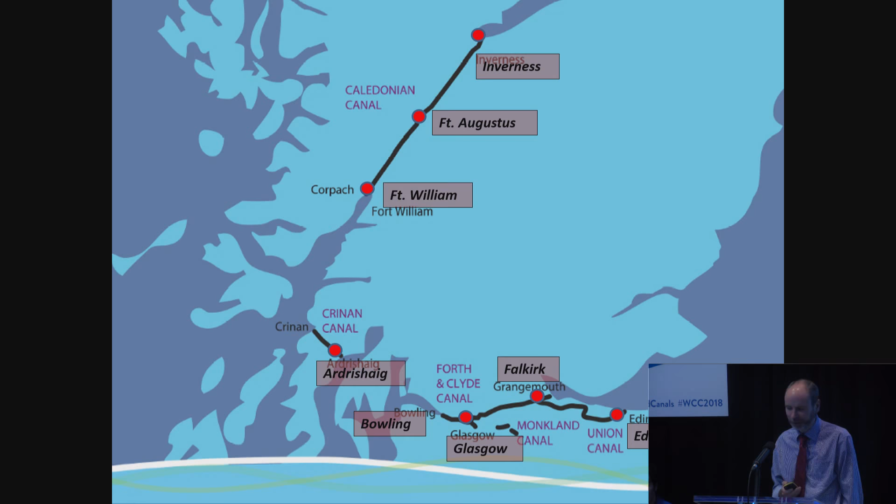In Scotland, we're lucky enough to look after 4.5 of the canals that are left, 140 miles from the Great Glen through the Caledonian Canal to the world's most beautiful shortcut on the Crinan Canal, and then to the urban canals in the lowlands with the Forth and Clyde, the world's first man-made sea-to-sea navigation, and the Union Canal stretching right into Edinburgh. And a tiny little bit of the Monkland Canal is left, but I'll explain as we go through where the rest of that has gone. So we look after some amazing views in Scotland.

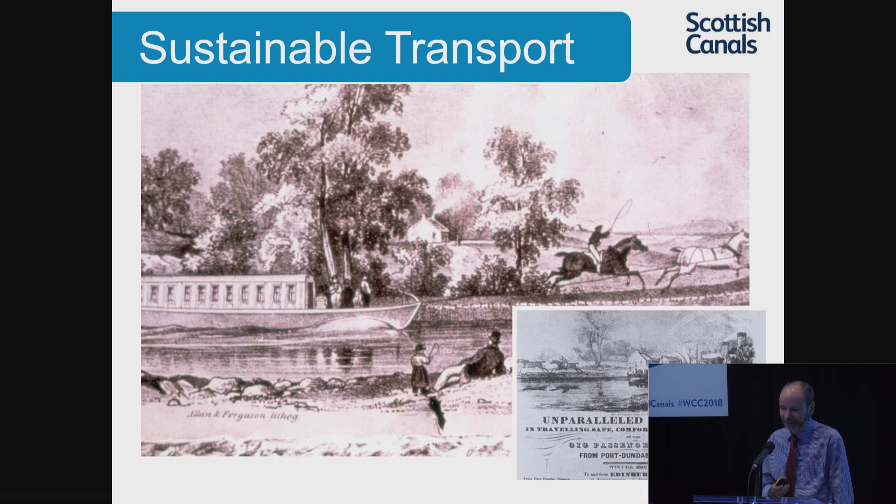And they transformed Scotland. You can see here, this very much could have been an EasyJet advert - unparalleled cheapness in 1820, extremely fast travel from one side of the country to the next. And you can see here the size of the industries that grew up on the banks of these canals, and the puffers that passed through.

And when you talk about EasyJet or Ryanair, you know, very similar - they piled them in and packed them in close and transported them through Scotland. But slowly and surely with the canals, and certainly in the central belt, the railways started to come along, and they really did challenge the canals in the 1850s and beyond.

The railways took a lot of trade from the canals by 1900. Slowly and surely, people's view of how important these canals were changed.

This is a picture here from the 1950s. This was the vision for Glasgow. Canals were no longer part of that vision. This was all about motorways, postmodern buildings, and when you look at Glasgow now, they pretty much delivered what you see in that picture with the motorways there.

They actually found the Monkland Canal as an absolute perfect way to build a motorway into Glasgow. So they filled in the Monkland Canal, put the motorway on top of it, and now we've got the Monkland Canal running underneath the M8 motorway. So it still remains the busiest canal in Scotland, but only for cars travelling over the top of it.

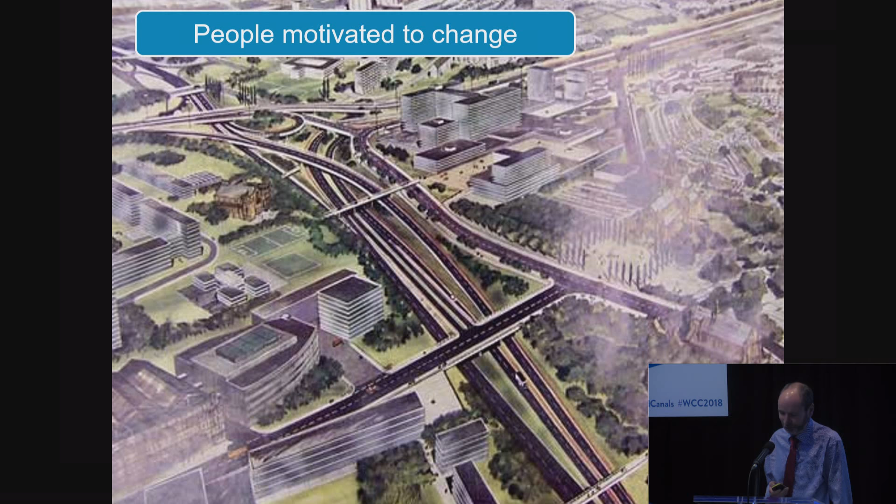1962, Central Scotland: the Forth and Clyde Canal is closed to make way for the motorways, and the Union Canal in 1965. Once you stop up canals, once you put culverts in place and people no longer see them as belonging to them, they fell into disrepair.

This is 1996: 'Our canal, our future.' The Millennium Link was born in the 1990s and fought through, and a lot of investment was raised - £83.5 million - to deliver a massive engineering project: to find ways back through those motorways, to lift the utilities, to put a new towpath along the side of the canals, to remove the contaminated silt.

When you look at this picture, this is Wester Hailes. This was a new town built near Edinburgh that no longer needed the canal, so they built roads and houses, filled it in on the Union Canal there, and never bothered to build a pavement because the car was the future. You can see the person walking along the road there, and that's how it was treated in the 1960s. We needed to squeeze the canal back through.

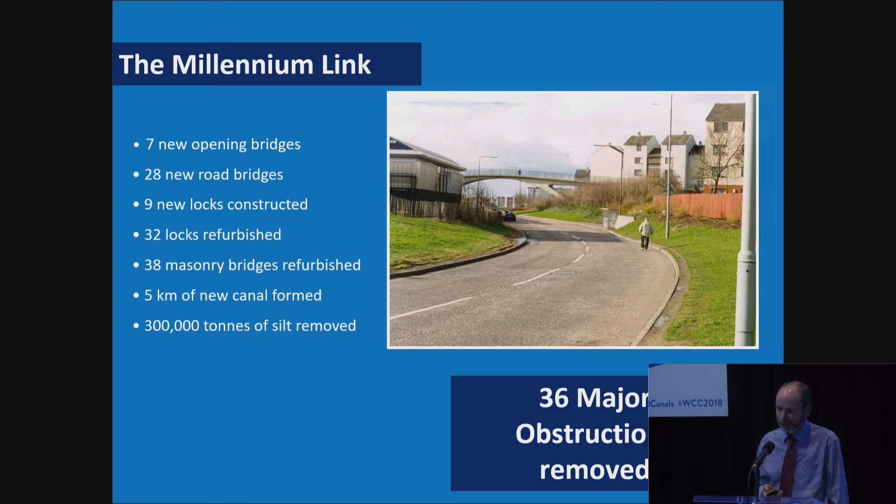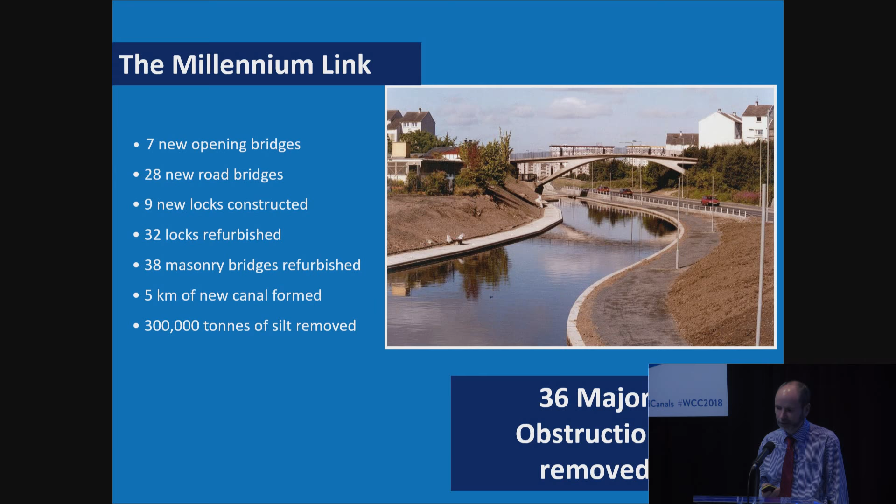So at the same bridge, we put the road to the side, squeezed the canal through, and reopened the canal right back into the capital of Scotland. And this is what it did - that's what the canal looked like, and that's what the canal looks like now. £60 million of regeneration happened around and about that end of the canal almost immediately. The boats arrived, the regeneration effect grew and grew, and there's now £120 million of regeneration in that area.

That was a contaminated site that had been Scottish tar works, had burnt for many years, and we had to, as engineers, resort to what we like best: a good malt whiskey, some Technic Lego and a pen, and some very late nights. We drew some ideas for what the Falkirk Wheel could be, and some great engineers started to come up with ideas for what this could look like.

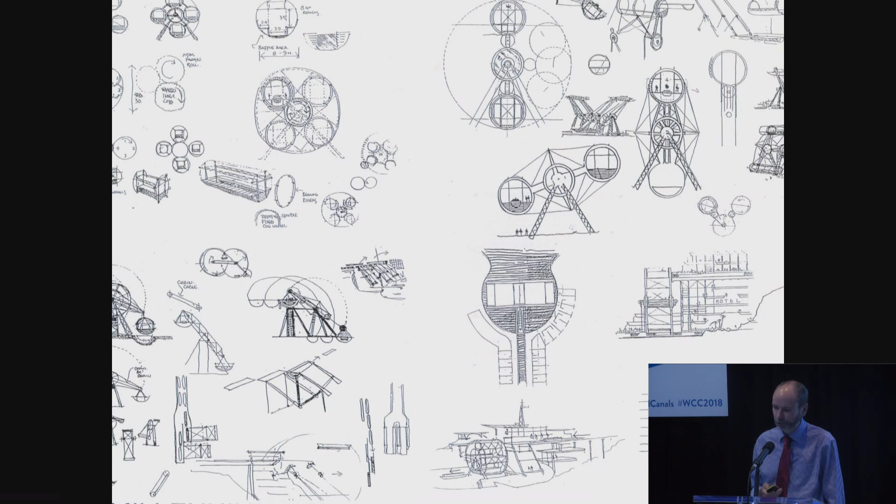Technic Lego does it every time - it created a new mechanism there, and we were able to show people how the Falkirk Wheel would work. That really built people's trust and belief, and the money came in to create the Falkirk Wheel. It developed on a field in Falkirk. People had all sorts of ideas as to what this was going to be, but there you go.

The Falkirk Wheel now welcomes 600 to 700,000 visitors a year to the site, day and night, to come out and experience it. It supports 60 jobs, and supports the regeneration of the local area.

Every penny that's spent, every bit of profit goes back into reinvesting in the canals. So that's the history, really, from way back in 1768 through to its glory years in the 1820s. But we now believe we're in a renaissance here, and we can take these canals to the next level.

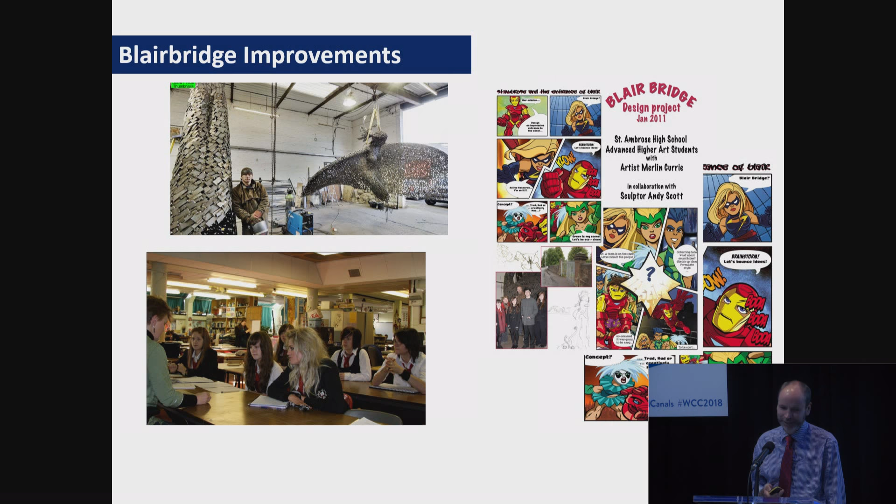This is the Monkland Canal, and again an entrance to the canal that really wasn't up to scratch. We worked with lots of the local school kids and got them involved. We found that Mark Millar, who wrote things like Kingsman and Kick-Ass and lots of comics, used to live three doors down from here on the canal. We got him involved, and the school kids just loved it.

They came up with all these themes as to how they wanted to interpret the canal, and they created these time-traveling twins. We also found what was certainly the UK's first iron boat. We were able to develop all of these ideas into archways that celebrated the canal and the future - that's Captain Coatbridge jumping out of the canal, saving the day, with industry and heritage on one side and nature on the other. A fantastic seven-metre high archway.

This was the first iron boat in the UK, and this was a model of it that had been made in the 1980s. We found it rotting and decayed. We got the school kids involved, and they wanted to turn it into a classroom. We were able to raise £500,000 and actually transform that and create a new classroom for them.

We've used art to celebrate heroes, local heroes in the area, and developed these sculptures which represent people who have been famous in the area and have delivered around and about the canal.

We've also brought artists in residence onto the canal. This is Leslie Banks, a fantastic artist, brilliant at painting water. She has delivered 60 paintings of the canal now and continues to run her gongoozling exhibition across the country.

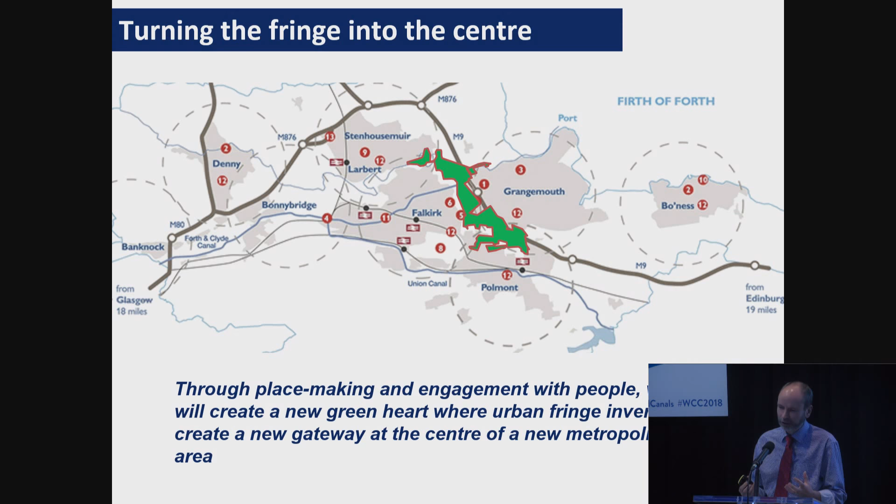In Falkirk, we've worked with the community again to develop ideas for how we could connect Grangemouth and Falkirk back together. This bit of green in the middle had been designated as green belt, and the community didn't want to be separated - there was no real way of getting underneath the motorway. They wanted to be together, they wanted space that they could share. We worked with them, and over 1,000 people engaged in this project to develop a people-centric idea of how canals and green space can bring people together.

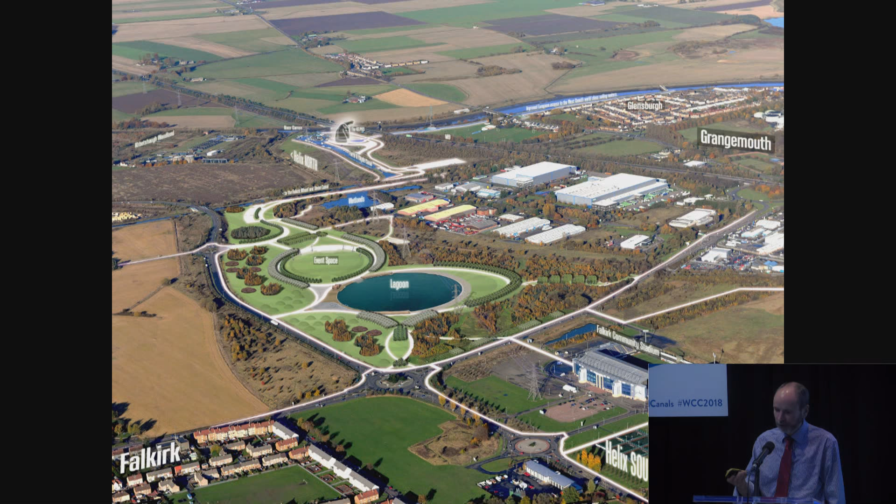We started bidding for a national lottery prize, and in November 2007 we won £25 million. We popped the champagne corks, we celebrated, and then we realized that the next day we had to double that money. Suddenly the recession hit, and we really struggled to get the rest of the money together, but eventually we did - and I'm so glad we did, because this was the community's vision to transform the space between Grangemouth and Falkirk into a place that people could join.

They wanted a new parkland, they wanted a lagoon, they wanted a canal that connected properly with the river. This is the community coming out to celebrate 27 kilometres of new paths being created. This scrubby bit of green space suddenly became a parkland that became famous in Scotland, and the community came out. One million people a year are now coming to use that green space. Before that, there were probably only 200 to 300 people, and a few deer - we've kept the deer, but we've also got the people in the space now. And you can see, this was the day we opened.

15,000 people on that first day came out to celebrate. What is this all about? How can we use it, and how can we have fun with canal water—even that dog drinking it there.

From a canal perspective, we wanted to finish the Millennium Link. We wanted to stretch the canal back down to sea because we'd managed to get the canal to the river, but what was left, as you headed downstream, was a motorway bridge, a 36-inch water main, another A road, and a sewage pipeline that you had to find your way through. And the boats really did not like it, and we had to find a way of squeezing them through.

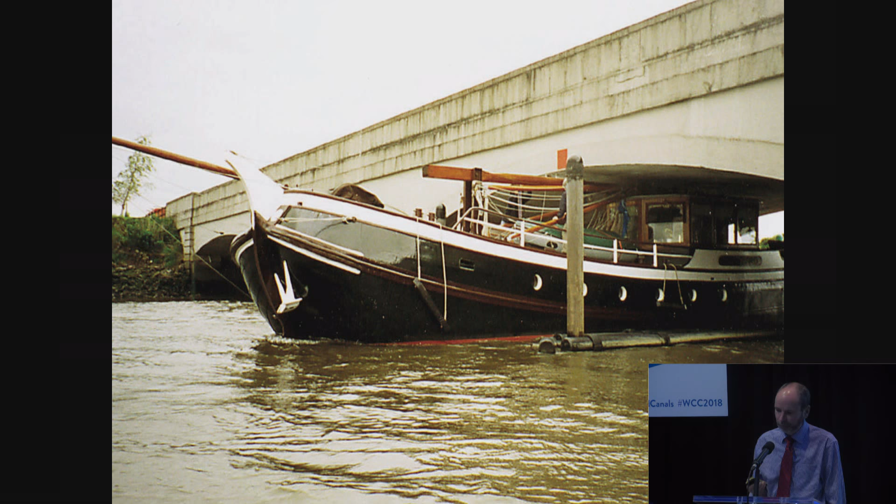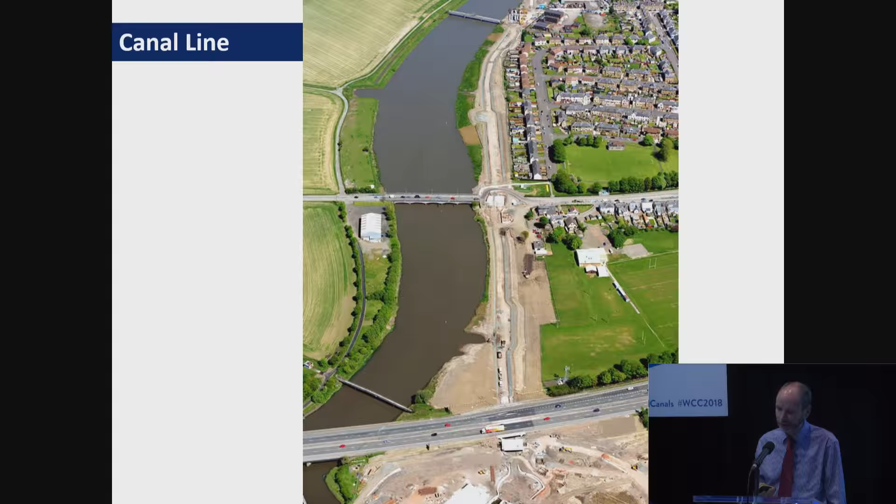So we designed a new canal that brought flood defence to Grangemouth, stretched 1 kilometre down the side of the river, and opened that in 2014.

But we also knew to get the money, we needed something that would catch people's minds, their hearts and soul. We needed to create, like the Falkirk Wheel had done, a real jaw-dropping icon.

So we looked to the past, we looked to the shipbuilding, we looked to the ironworks, and we looked to this wonderful legend of the world's largest horse, Carnera. Not sure it was the world's largest horse, but by legend it is—amazing what you can find on Wikipedia. That horse had been in Falkirk and had pulled one of our national drinks, Barr's Irn-Bru, round the town, and it was very much a local hero.

And we looked to this idea of the legend of the past, the Kelpies, which were mythical Scottish water horses. Nessie is meant to be a Kelpie. They had the strength of 10 horses and the endurance of many more.

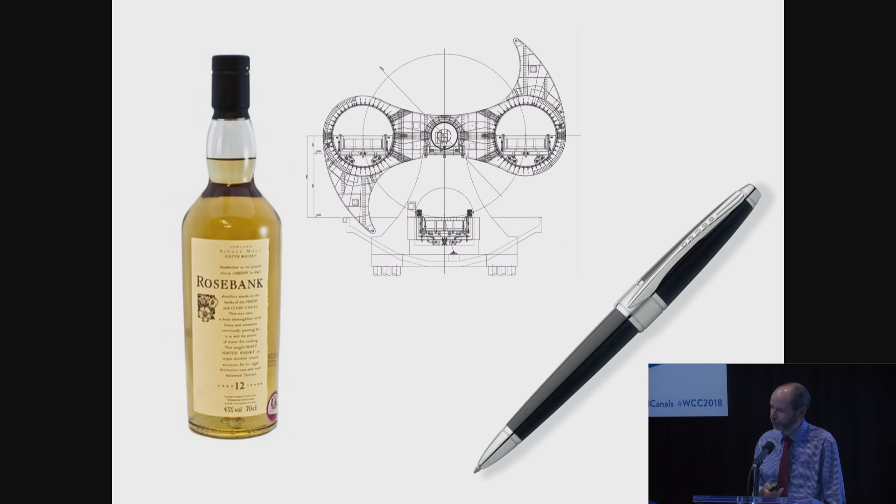So we took that idea and we developed it, and we looked around the world at some of the best art that exists. We took those ideas and found an artist we liked in Yellow Pages, and we got him out for dinner. Before that, we'd resorted back to our whiskey, our Falkirk Wheel, and our pens, and we had a few late nights—I think this night we might have had too much whiskey, because this was the idea we came up with.

30-metre high horses' heads that would be a counterbalance to a lock chamber that would lift them out of the river.

We knew we hadn't quite got it right that night, so we sat down with the artist, and he started scribbling out what this could be, what we could develop, and how it could be. He slowly and surely brought these designs together.

We knew we'd got it right when you took it out to the public and the kids started stroking the horse. It was a chunk of steel, but they kept stroking the nose of the horse and starting to wear the nose down. And this was the idea for the Kelpies.

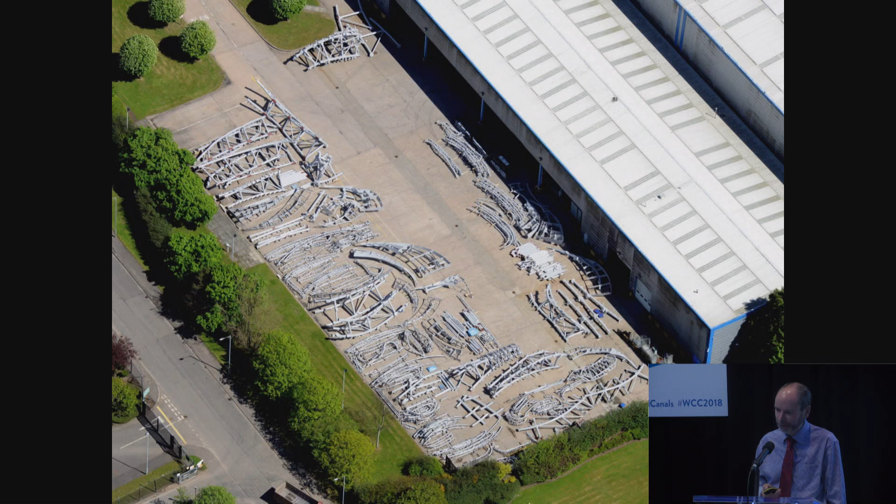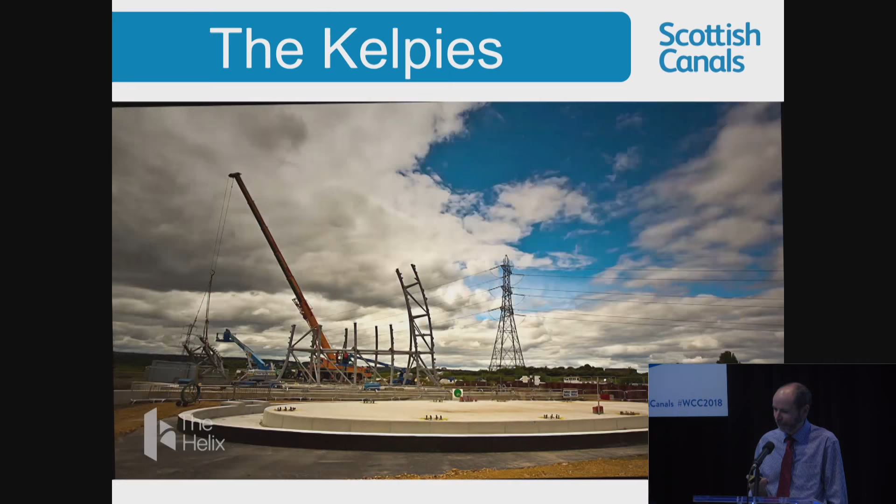We were lucky enough to win the money, and lucky enough as an engineer to get the biggest Airfix model you could possibly ask for. We got all of these pieces of engineering, and then slowly and surely we were able to build them on site. So 3 years of design and fabrication brought together the Kelpies and delivered within 75 days.

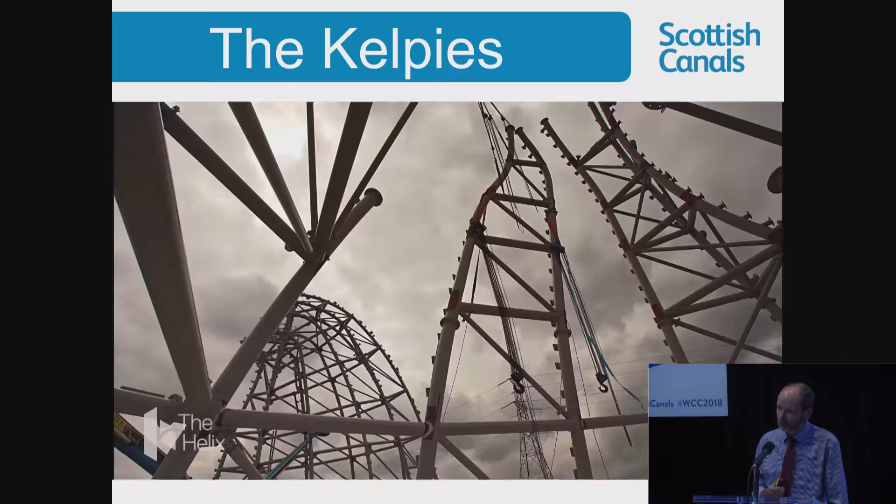They transformed this corner of Falkirk and created these beautiful pieces of art. You can see right through the middle of that, a lock chamber going through the middle of it. This is a welcome to Scotland—this is how you arrive through these colossus that is the Kelpies.

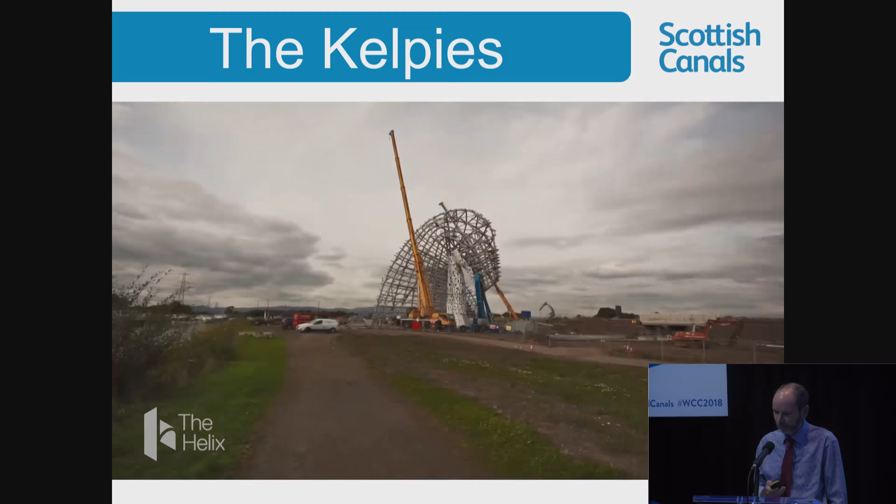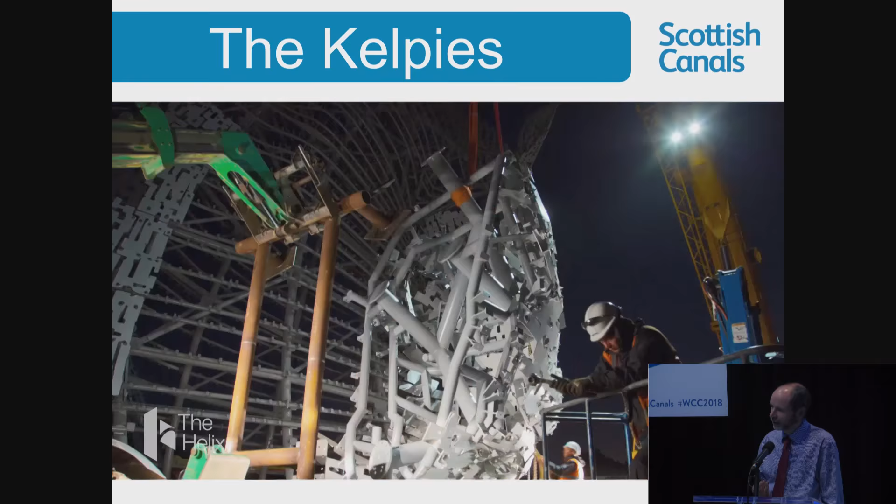Slowly and surely they get ears. Need to speed this up—there's some tricky lifts in the middle of this. But that gives you an idea of how canals, imagination, and reimagining places can change places in literally 75 days.

You get an idea of the cathedral-like space inside and the beauty of the sculpture that is there. And again, that's now bringing 1 million people into a space between a sewage plant and a motorway. It really should not work, but people are coming out to spend time, and they have ownership of these Kelpies.

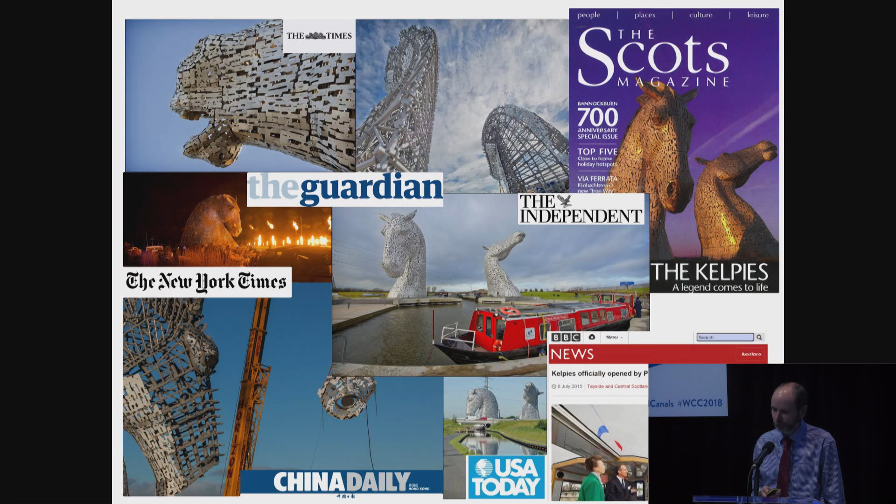That's taken us global. It's taken us to Chicago, New York, and various other places across the world—we've been able to go with the Kelpies. And it's got the boats coming back through the canal.

It's horsed us past the winning post. It's been to the Ryder Cup twice and has helped the Europeans win the Ryder Cup - it wasn't the last one. Maybe that's something that you need to think about.

But you can see here where we've been with the Kelpies, and you think how the canals have changed in 20 years. We've even had royalty visiting, and almost as exciting for me as an engineer is the fact that we were able to launch the Ferrari California T at the Kelpies. That's how canals can transform, that's how people can see their communities change, and that's part of what Scottish Canals does.

In literally 20 years, we've been able to take canals from places where people left their minis, left their sofas, put their shopping trolleys, and we've been able to transform it, and the effect has been amazing.

In a study that we did in 2015, you can see here the canals over the last 15 years have supported 5,000 jobs. They've seen almost £1 billion worth of investment - £83.5 million in 2000 and 2001 has delivered almost £1 billion worth of investment and supported almost 5,000 construction jobs, and 5,500 new houses on the banks.

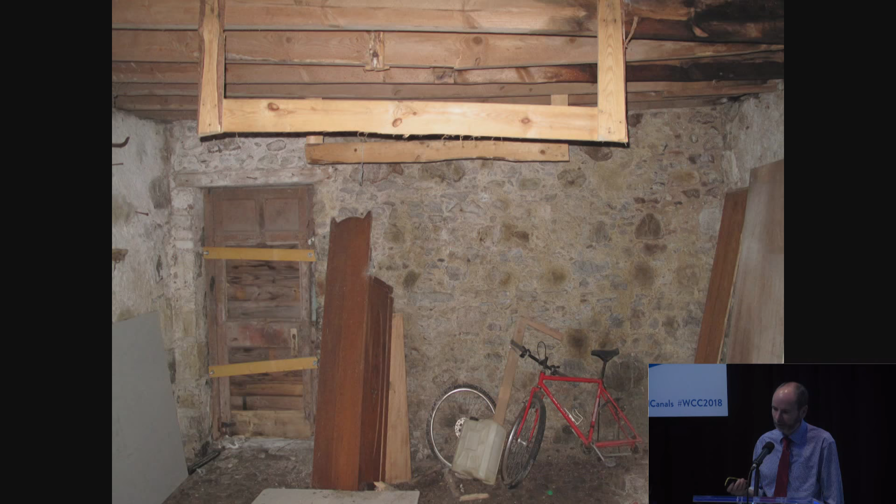Build the quality in, encourage people in, encourage the spend, transform buildings that look like this into that. People will spend money, and that money again gets fed straight back into the canal.

From Glasgow, where there was derelict warehouses, they've been transformed into flats. People want to live on these canals now, so we have boats on the canal, we have places where people can live, and the demand is really strong.

We've developed our own products, and that bottom left-hand side is a shopping trolley transformed into a chair, through to our own tweeds and our own tartans, through to the Caledonian Canal Centre that has just opened. It's a fantastic space with a cafe, with a shop, and people spending money, but there's money then being reinvested back into the canals.

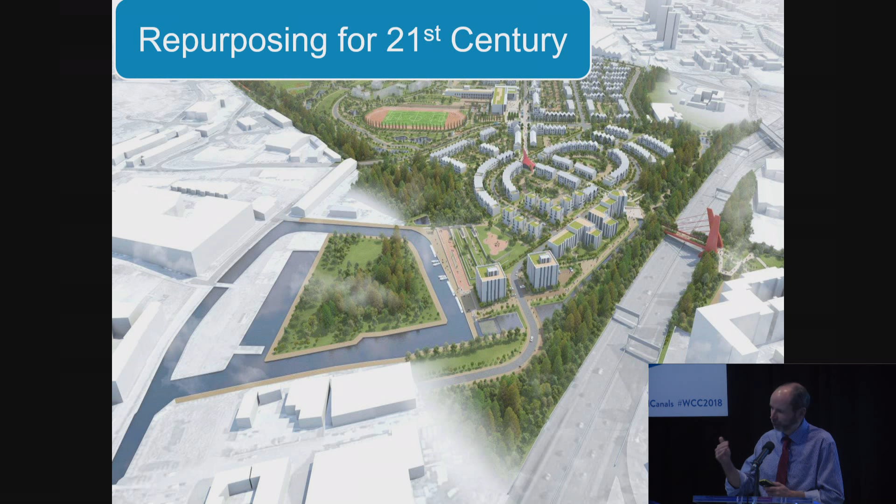Right through to repurposing them for the 21st century, where we're now taking surface water from 5,000 houses and charging for that surface water to come into the canal, managing the canal dynamically so that when we know a storm's coming in, we can drop it by 100 mil and we can take that water into the canal.

So to finish off, I took this picture 20 years ago, maybe a little bit more now. That is Falkirk 20 years ago. And when you think about where we've got to now, we have transformed.

We still have our challenges - the asset management is hard to deal with, and we've got to keep working on that. But places can be reimagined, places can change. Working with communities, the most amazing things can happen. Thank you for your time.

Thank you so much, Richard. That was really incredible. It's amazing to see how art can influence engineering and vice versa, and how really what's so incredible is that you can give people who are in maybe deprived areas a sense of pride in the place that they live, and that they can see that they too can live in a place that's incredibly special. So that was really fabulous.

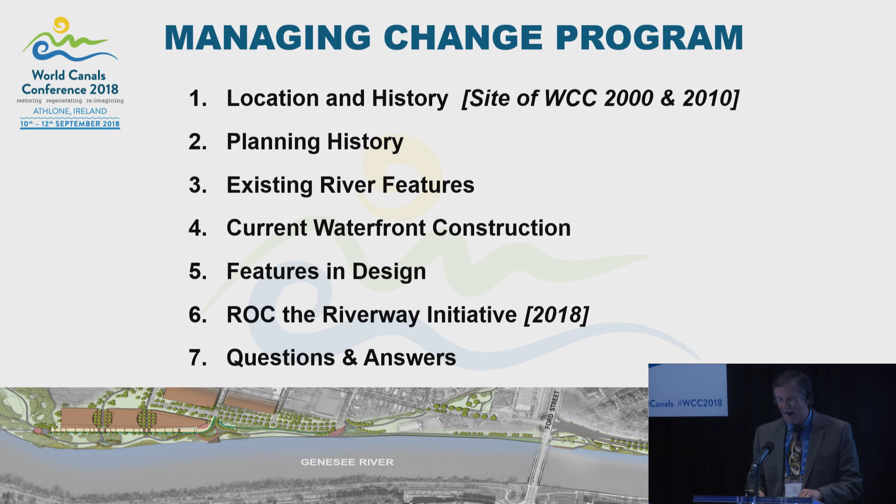So my change program here, managing change program, is roughly to look at a little bit of the location, the planning history that's gone into this, the existing river features that are there now, some things that are currently under construction, features in design currently, and then looking at the new initiative called ROC the Riverway. You'll hear more about that shortly.

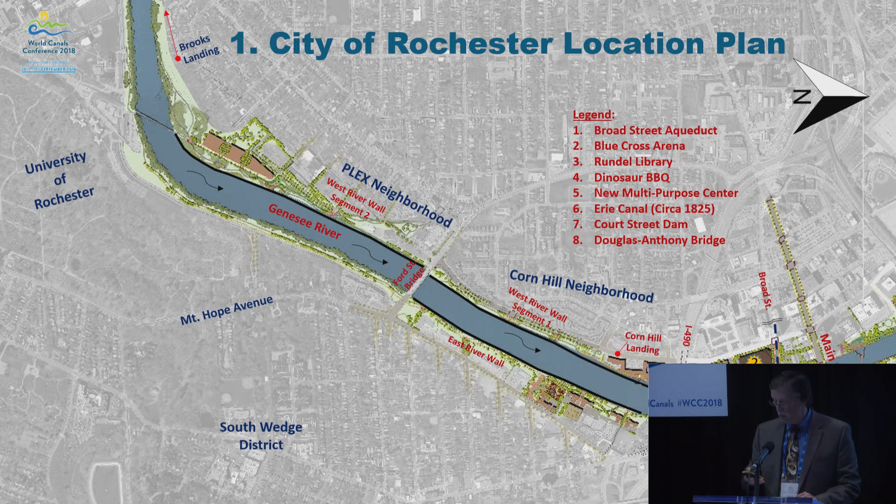Number 1 is the Broad Street Aqueduct - that was what you saw in the picture to start the presentation. That aqueduct goes over to feature number 2, which is the Blue Cross Arena, the main facility for events in Rochester. So that's kind of the course of the study here and this presentation.

Looking a little bit at the planning history, this is really about a 30-year planning effort. As you see, it went from a corridor land use and development plan back in the mid to late 80s through this ROC the Riverway initiative in the current time. But you can see the escalation of the program - it has increased in activity. What was 5 or 6 years in the making of each of the earlier events is now in a year-to-year effort.

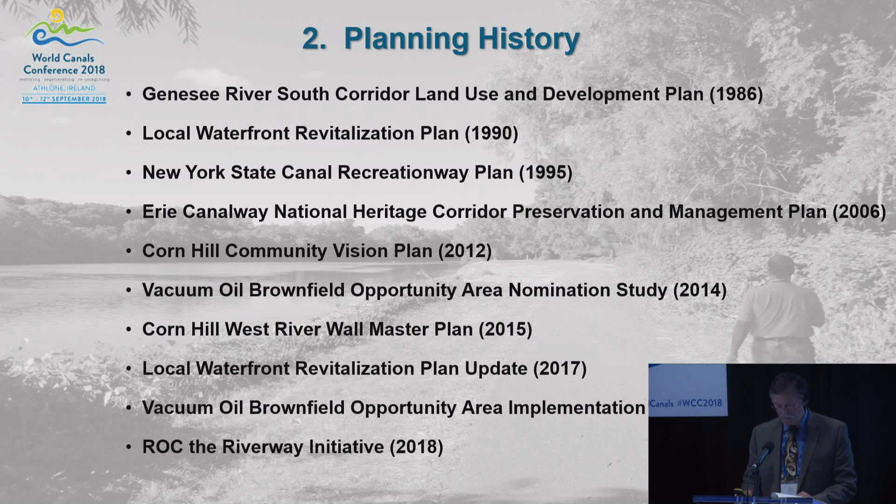So the story is growing. Resurgence in the corridor is definitely on the rise. The Genesee River has become the centerpiece of downtown again, as it was in the 1800s and 1900s. And our planning efforts have come to fruition, or are beginning to.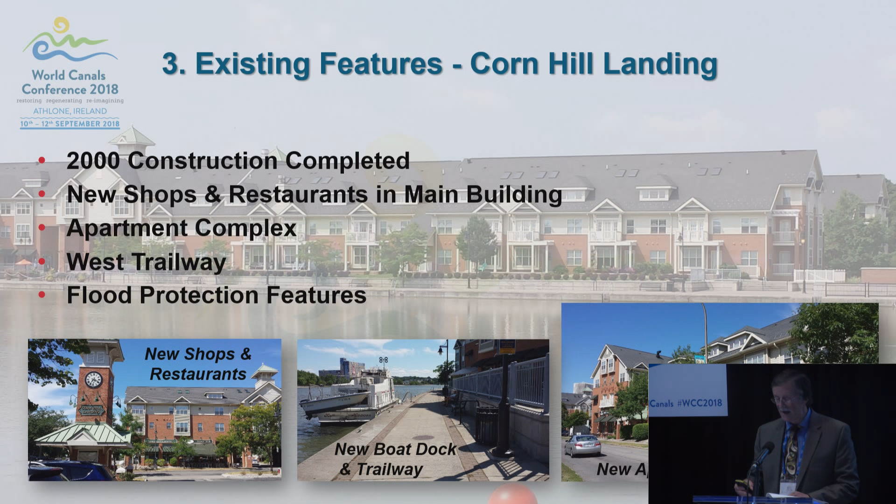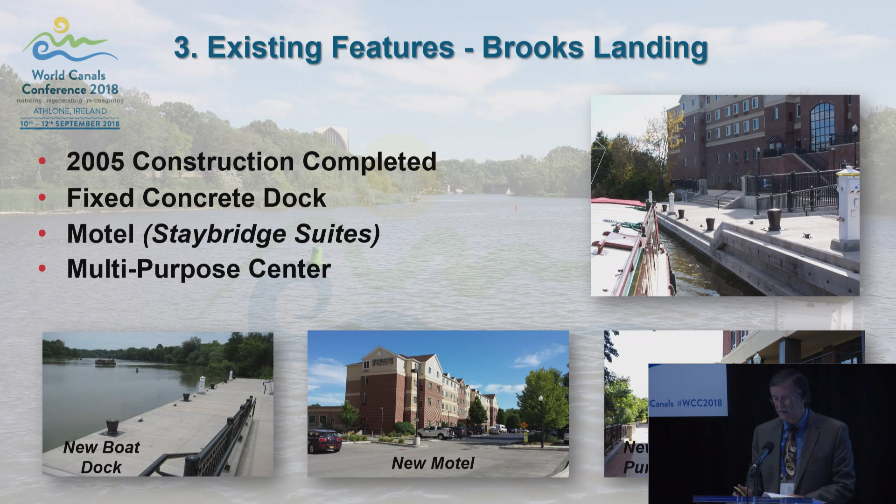Shortly after that, Brooks Landing is a program that was developed. It was about 2 miles upstream of the other facilities, and was completed in 2005 as a fixed concrete dock for boat docking. It has a new motel, currently the Staybridge Suites, and a multi-purpose center adjacent to the new motel. That was all private money, but the dock itself was in city funds.

Currently, there's construction ongoing for some new features along the river. On the left is the river wall being rebuilt, again to improve confidence in flood protection through there. That's actually downstream of the Court Street Dam, which you can see in the right background. That wall was restored with concrete and form liners to make it look like a masonry wall, a combination of new and old materials.

Along that, the raceway that fed water along the east side of the river was also rebuilt. That's what you see in the middle section, called the Johnson Seymour Raceway. It used to feed water to the Rundel Library and downstream to other facilities, mills and industries of that sort. You also see a trailway continuation from Court Street Bridge over to the trail, going around the most popular restaurant in the area, the Dinosaur Barbecue.

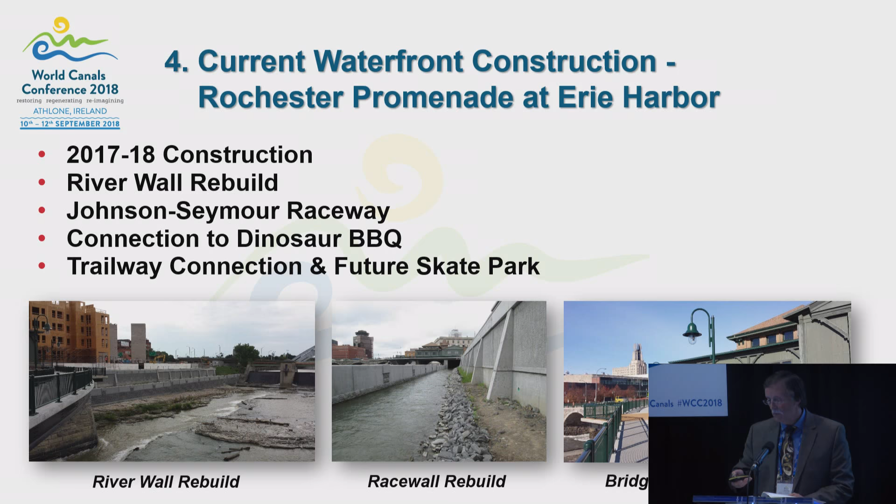Some of the other current construction adjacent to that is called the Nathaniel. It's being constructed this year and next year, a large 5-story building mostly for residential apartments, on the backside of the Promenade Foundation. It's about 600 feet long, 180 meters, and 5 stories tall. Originally it was envisioned that this building would have openings so you could see the river, but sometimes you have to be careful what you get. This 600-foot-long building basically blocks the view from the east side, so you don't actually see the river through there. It also blocked the original canal path, so now anyone who wants to restore the canal would find it prohibitive to do that. Sometimes what you get is not exactly what you started off wanting.

Also currently in design, we're working on the two segments of the West River Wall on the other side of the river. You can see the degradation of the wall on the left side, and the middle picture looking down on the wall shows it's deteriorated along its course. That's looking down from the historic Ford Street Bridge, in the Corn Hill neighborhood.

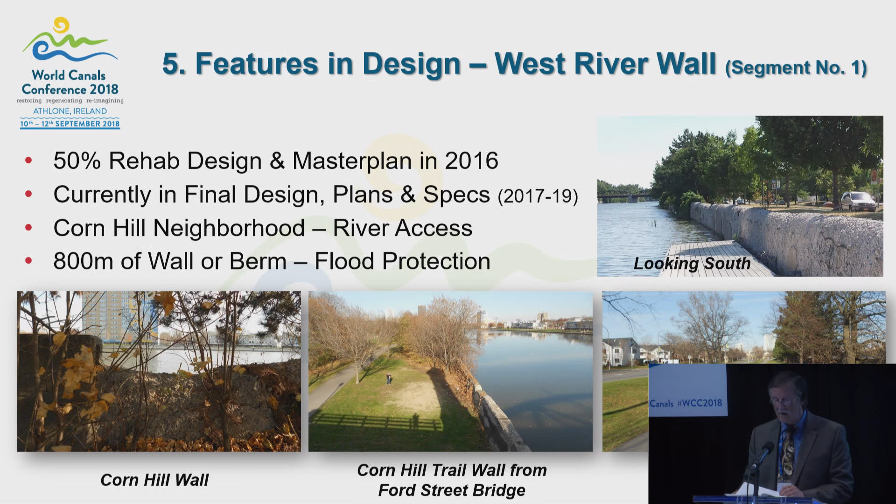Segment 2 is just to the south of Ford Street Bridge. It's currently in preliminary design, and should be completed in final design and plans and specs by the end of 2019. This is considered the PLEX neighborhood as far as the neighborhood name goes.

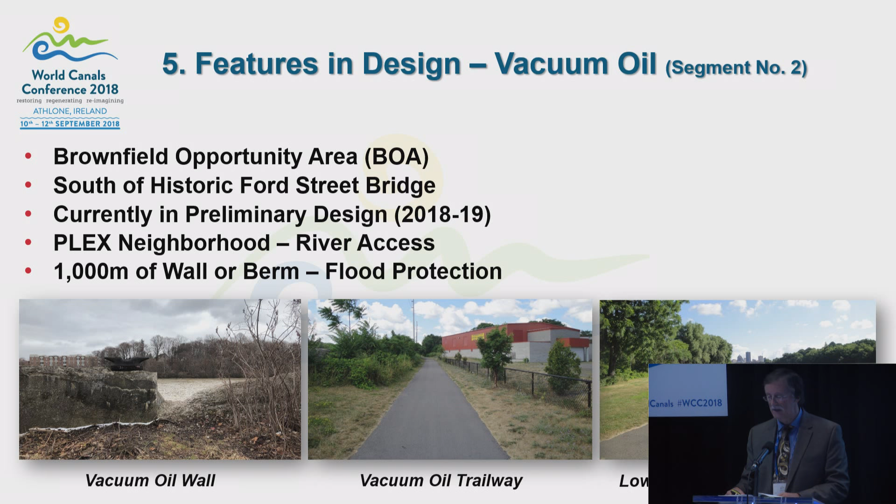The ideas are, again, to provide river access and flood protection. This is about 1,000 meters worth of wall or berm structure. You can see in some places the wall is taller. On the left, you see degradation at the joints of the wall; in the center, the trailway; and on the right side, a lower wall. In that case, the ground elevation is enough to provide significant flood protection as necessary.

Here's some visionary photographs, just renderings of the sites. This is what it is intended to look like. These are shots from the master planning that's been done over the last couple of years.

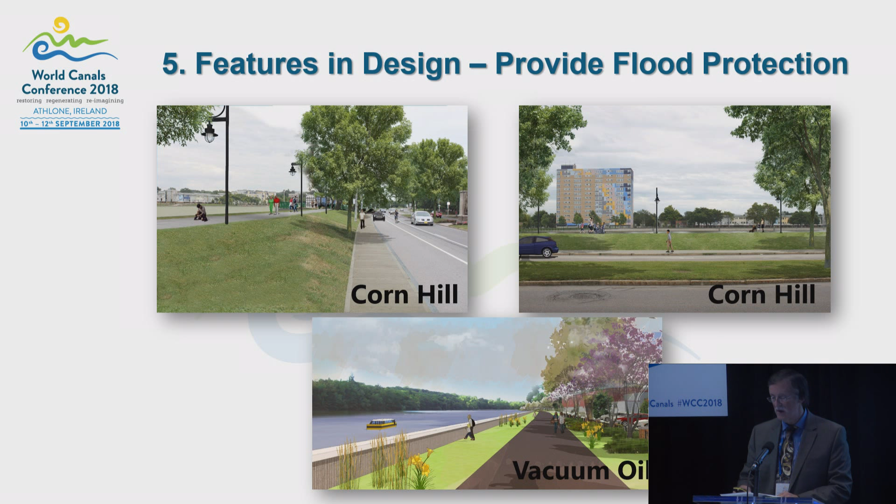So again, Corn Hill and Vacuum Oil are segments 1 and 2. You can see how it's opened up. It intends to let you see the waterfront more openly. The pictures of the wall before had a lot of vegetation growing up, so now you're opening up access to the communities, and you either have walls or berms.

The wall itself will be at least partially paid for by the state, because it is part of the canal system and it's their ownership of the wall. But the developments along the river would be the requirement of the city to provide the funding for that.

And then the exciting thing happened early this year, in 2018: they announced the ROC the Riverway. We had been doing these projects every couple years, some in construction, and we thought maybe that was it for a while. But there's a grant system in New York State that provides assistance or startup money for various projects around the state, and the city applied for that, and won an award of $50 million, which was announced in February.

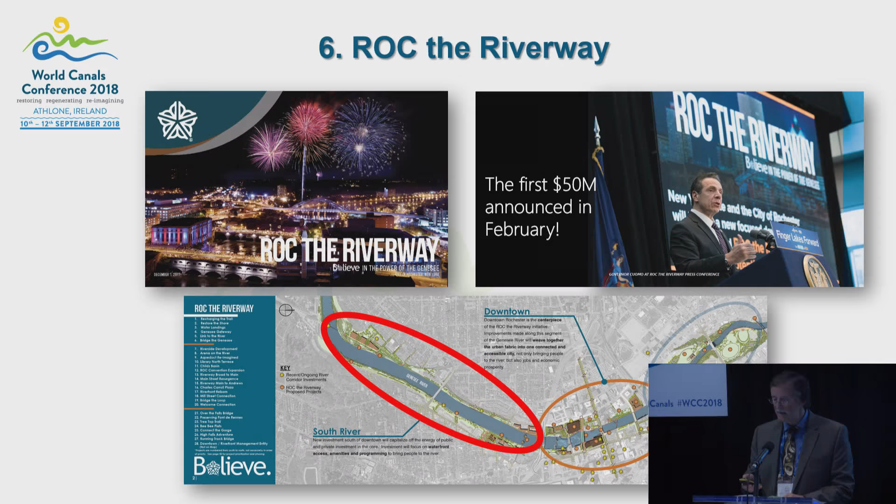Then this August 1st, just a month or so ago, the governor of New York State, Andrew Cuomo, visited Rochester and announced that 13 of the projects would get funding from the $50 million. So there was seed money put in place for each of those designated projects. They get anywhere from $1 to $20 million apiece. That's not enough money to complete any given project, but it's a good amount to get them started. So the city, interested parties, and private industry will have to come up with more funds to make each of those happen, but that's the plan.

Some other things are happening along with this. This fall, about a month from now, the New York State Canals Conference will be held in Staten Island, which is downstate outside New York City, one of the 5 boroughs. There's going to be more news on this ROC the Riverway presented there at that time.

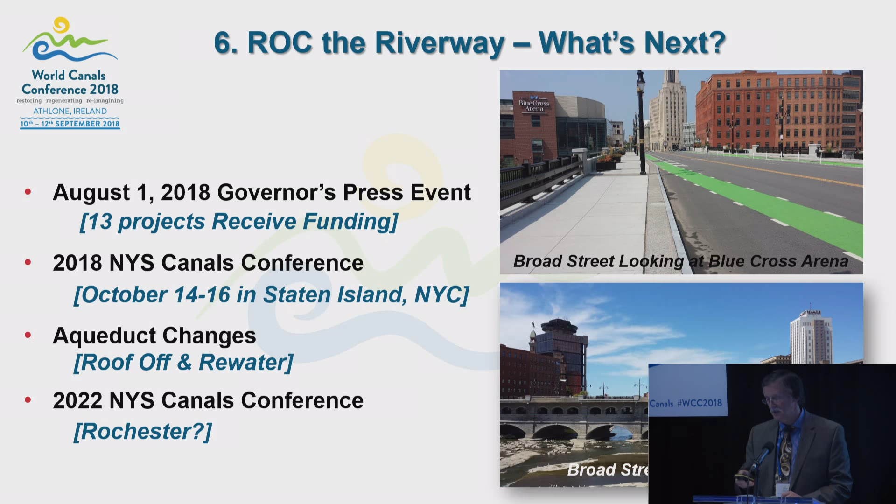Very good. Thanks, Bill, for that. It's amazing to see the length of time you're talking about, over a period of 30 years, the amount of time these kind of projects take, given the huge degree of complexity, the costs involved, all of that. It's hugely interesting to see these things take a lot of time, but they're certainly very worthwhile. And just the sheer extensiveness of what you were discussing shows that. We look forward to hearing about ROC the Riverway maybe in a couple of years at future canal conferences.

We're going to go back across the Atlantic now to Denmark, and our next speaker is Henning Stuben. Henning is the co-founder of Urban Agency, a leading Copenhagen office and consultancy dealing in development, waterway development, and waterfront development projects. Henning himself is considered one of the leading experts for waterfront developments in Northern Europe. He has done a lot of work in Germany and in Scandinavian countries, and he's been in charge of a number of important international commissions and competitions like Kalvebod Waves — I'm sure I'm not pronouncing that right, but that's my worst Danish accent, I'm sure Henning will pronounce it properly for us — in Copenhagen, the iceberg dwellings in Aarhus, which I have visited and I'm looking forward to hearing about, and the Lille Youth Centre in France. So we look forward to hearing about those.

If you see what has been shown here from both England and the United States, you might notice that in Denmark you don't have to have a fence if you are on the waterfront. So for any kind of access to the water, you have to take care of your children yourself, because they just say this is part of our urban landscape and you basically have to deal with it. If you fall in, you don't die. And it makes a big difference — you get a much closer relation to the waterfront.

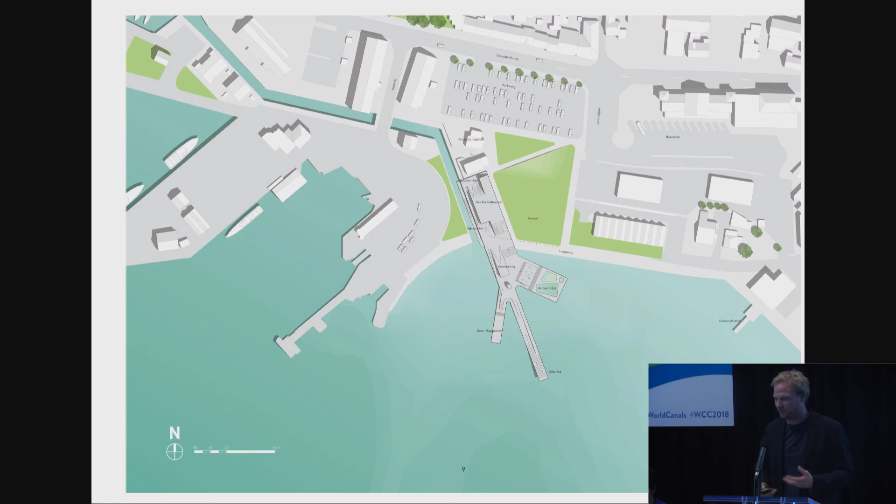This was a very dead part of the waterfront behind a station that was abandoned, very close to the city center. The brief was basically asking us to find a way to get the Faaborg citizen back to the water in this space, and how can we make them use the water. So for us, it was very important to look at what is the situation here.

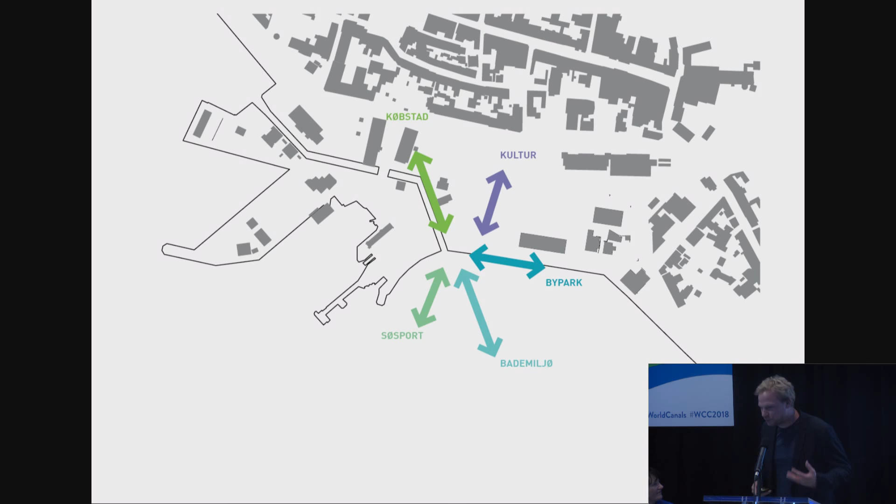We have a link along the promenade, and a link back to the city center. There's some cultural facilities here, and what we actually want people to do is to use the water for bathing, for kayaking, to just relax at the water.

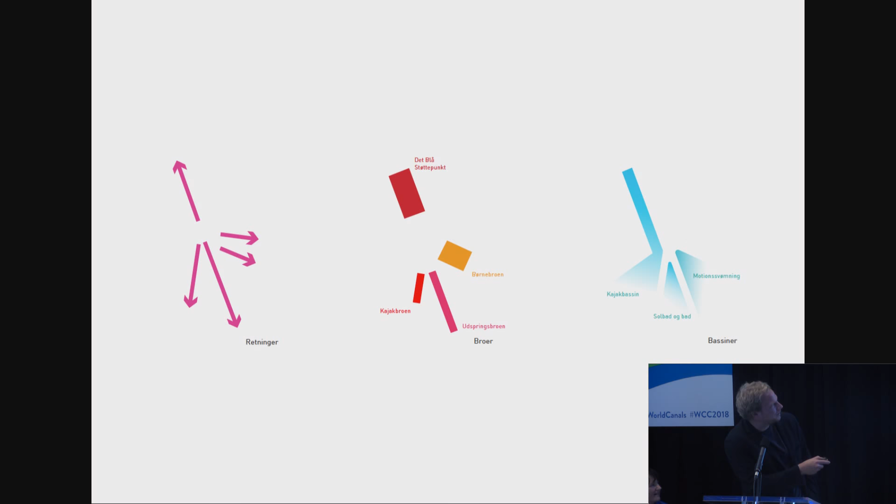So we made a series of diagrams of different functions that we could imagine could happen here, and designed what we call the finger plan, where there could be one pier dedicated to children, one for young adults who want to go wild and jump from the jumping tower, and then a whole function for kayaking, because part of the money was from something called the Blue Support Point, an organization that organizes kayak routes along the archipelago. They needed a point where you could wash your clothes or have a warm meal while on this kind of kayak camping holiday. So this is the on-land part of the development, and these are the piers that stick into the water, with different water activities in between.

Already in the competition, it was very important for us to show that we stay at a one-story height and leave the skyline of the city intact behind, and then deal with different relations to the water—being up on a jumping tower, on a roof of a boat storage space, a sauna, and then somewhere all the way down where you can stick your feet into the water.

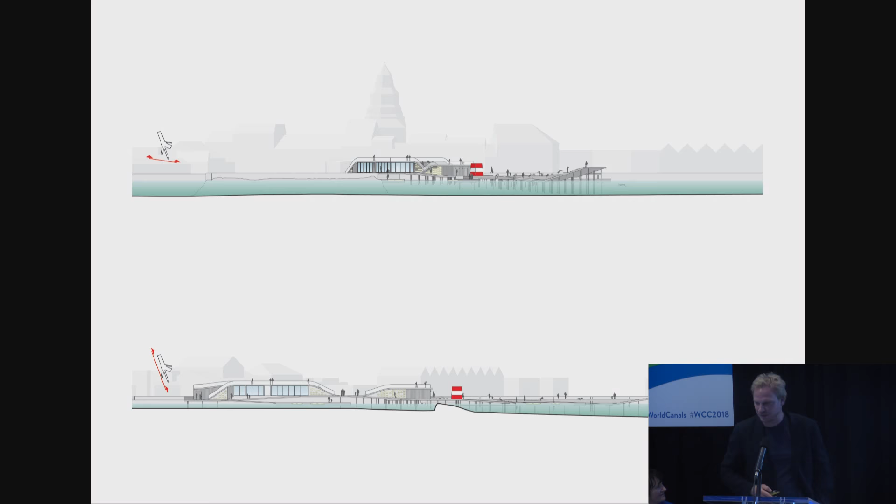This was in the primary design phase, where we illustrated in the render how this would look, and explained that the main square becomes the cross point of the promenade that leads along the canal and along the existing promenade, becoming a hangout and meeting space related to the kayak users as well.

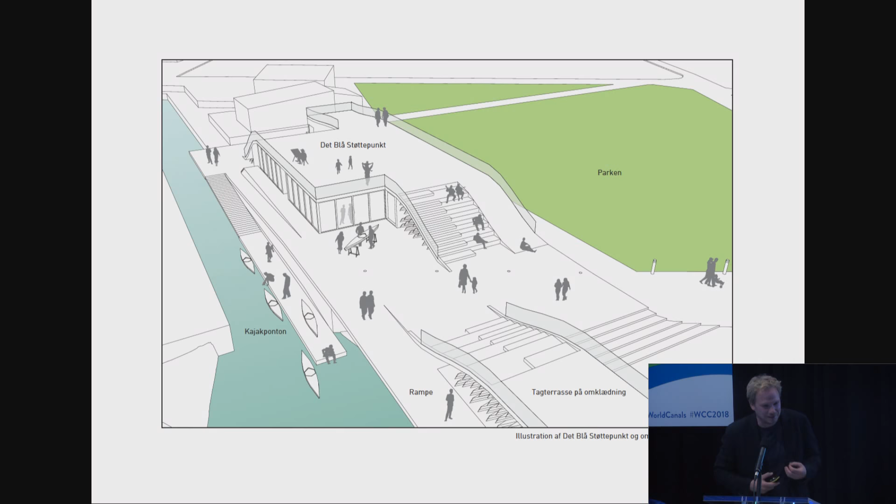Very early in the process, after we had won the competition, there was a series of 5 workshops where we invited all stakeholders, like the local kayak club and the local winter bathing club, in order to make something they get ownership of and feel closely related to.

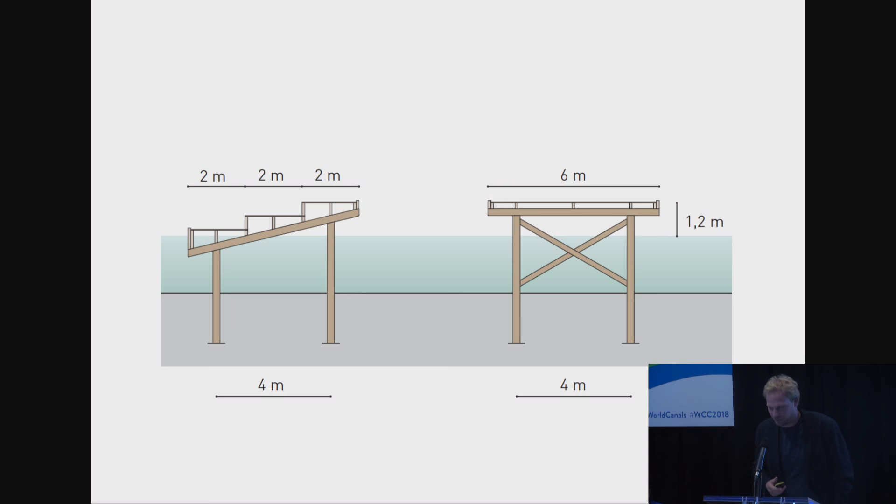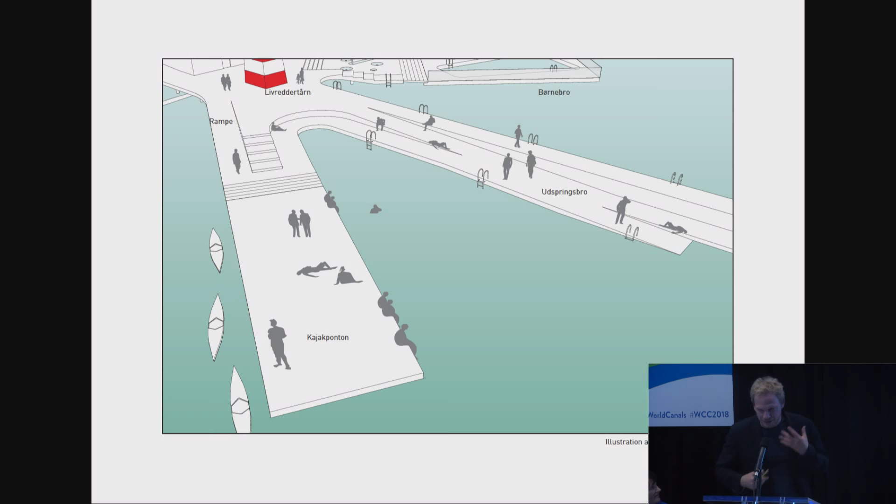We explained the project very simply and said, actually what we want to do is a classic Danish bathing bridge, or like a jetty, where you have just piles and walk on a wooden deck. But we wanted to work with it and change the relation to the water, and sometimes it can flood a bit, so we started tilting it and working with steps, creating more variety in how you experience the water. So you have different heights where you can sit and lay down, or the kayak pontoon where the kayaks arrive, giving a more lively relation to the water.

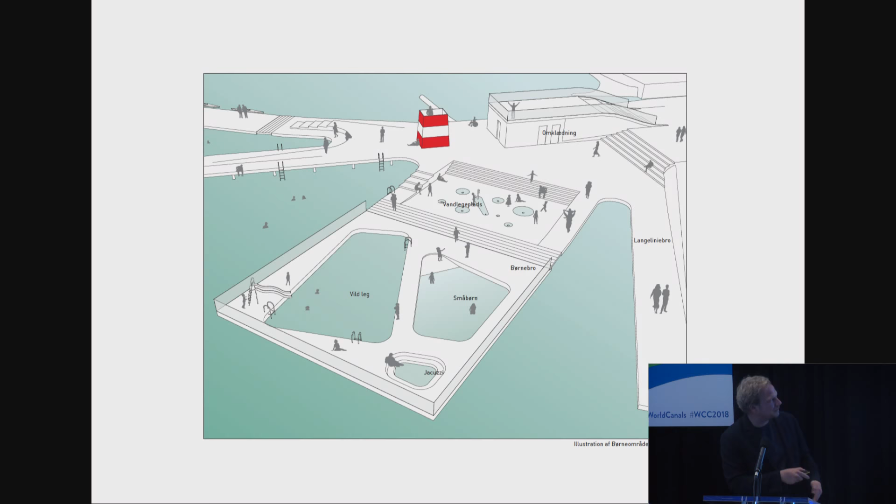Then this is the kids area, which ended up looking a little less rational—it's basically a floating bathing area. There's a bottom piece so there's always the same height in these basins, so kids know what they're getting into, and there's a water playground.

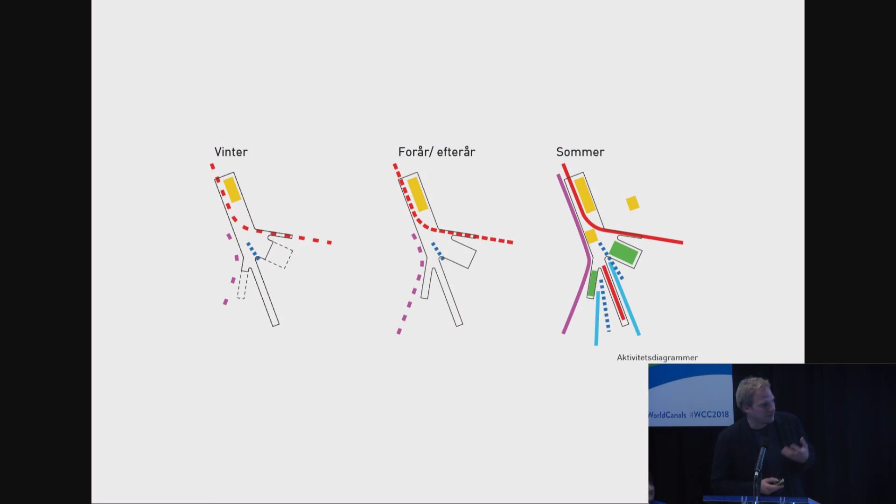One of the important things is how you can sell this idea in relation to how it can work over the seasons—it's not only active in summer, but there's a very lively community of winter bathers who also go out, even when there's ice on the water, which you don't get here. Different functions have different intensities over the year, but people do kayak in the winter too. So there was much attention to how the different functions can work together to activate it all year round.

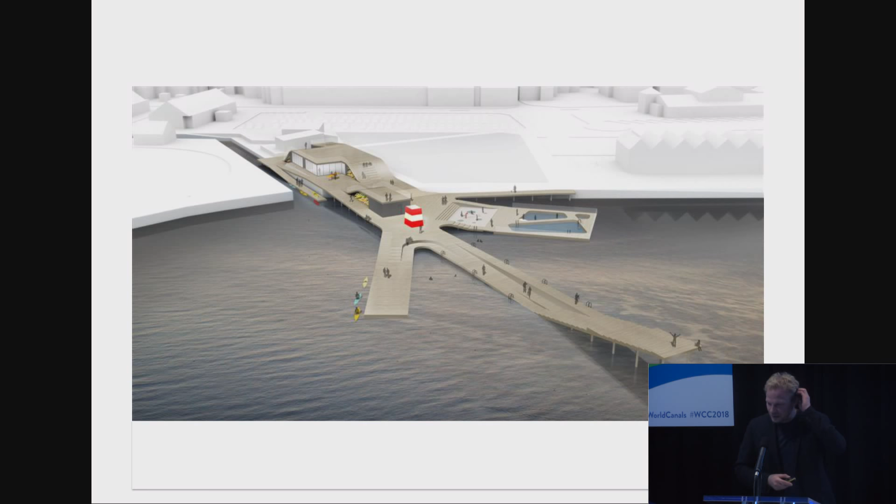This is one of the illustrations we made for the competition. From that step on, it got basically real. This was a competition entry where they had the fundings, but it turned out that what we were doing here was actually going to be slightly more expensive than what they had money for.

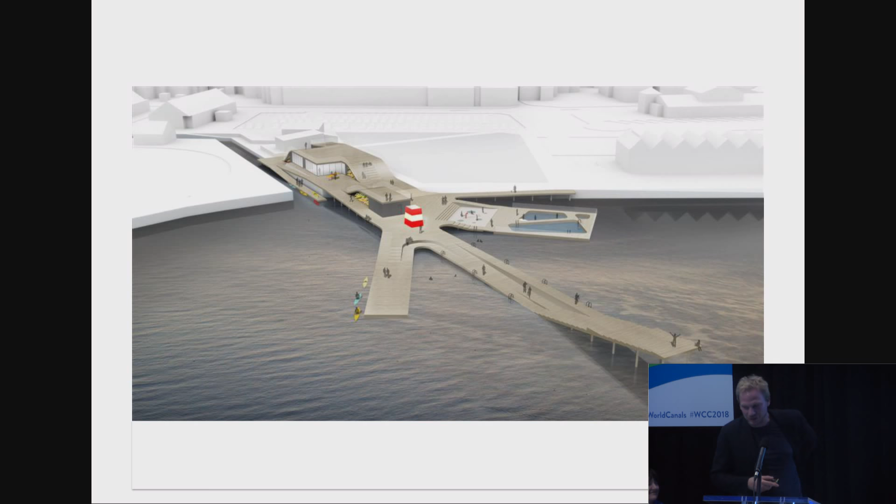In our competition, we didn't have to calculate exactly, it was more like an ideas competition. But we were quite happy that what turned out is actually very much as we had it. They had a second phase where this blue support point would become much bigger, but in a way we felt we could keep the idea of the project intact, although we went through whatever, 30% savings or something.

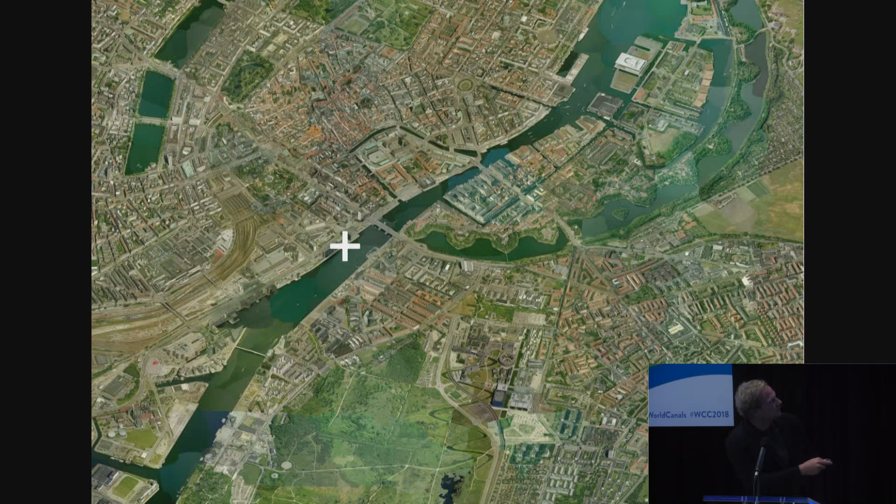In both these projects, there's a foundation that was involved, and they take lottery money and put it into sports and movement in public space. They also gave a lot of money to this. So we are in the city center of Copenhagen. We were part of a project called the Metropolzone, to activate certain spots in the center of Copenhagen that were basically deserted. We have this promenade, and while here on this side we had a very active development with the harbor bath and a critical mass of people living there who actually use this waterfront, which developed very much bottom up.

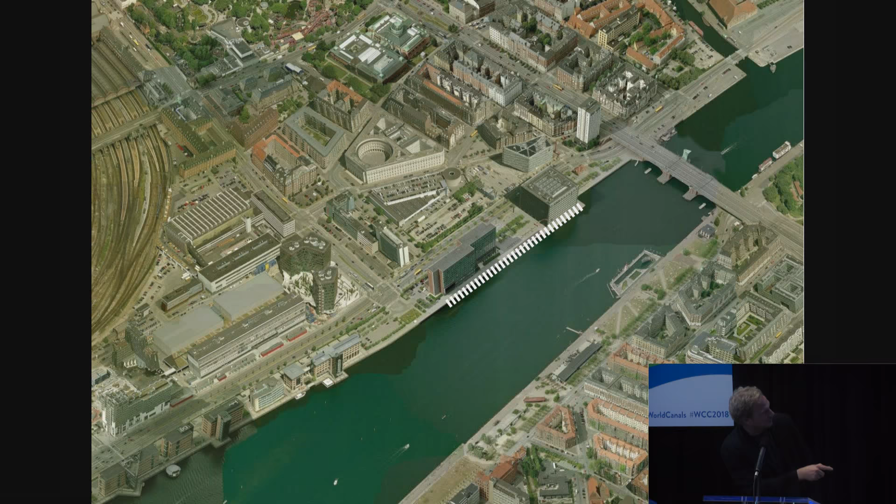The municipality of Copenhagen in the 80s, on the other side, made the mistake to just, because they needed money, sell the land to totally uninspiring developers who basically just made some headquarter buildings. This is a hotel and this is a bank.

And so we got this very stony promenade that had relatively high distance also to the water. It's like 1.70 meters down. And on the other side, you had this kind of, you can almost say it's like a people's park. It was really developed bottom up, and they found a boat and put it upside down and made a roof and all kind of funny things.

I was also involved in the harbor bath, but I always was somehow wondering why it cannot work on the actual inner city side, which is where you'd expect these kind of things to happen.

So while we had this, this is what it looked like from the hotel. Even the hotel, where you'd expect them to have a terrace or areas to sit outside, had no ambition whatsoever to involve the water. So this is the hotel facade. It's not even like a terrace door to sit outside or something.

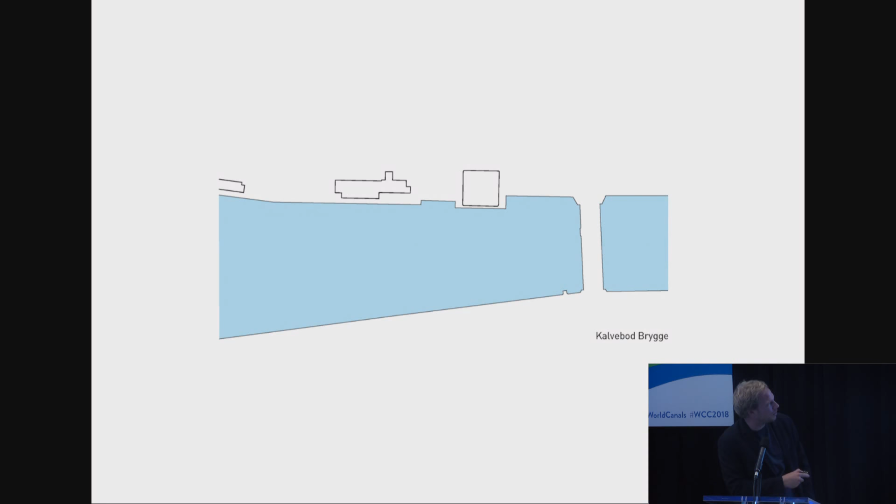So what we said is, fine, we have the promenade. It's actually owned by the bank. So unfortunately we need to make a promenade next to the existing promenade, because they were absolutely not interested in any public life. So we said, no, then we just do our own thing.

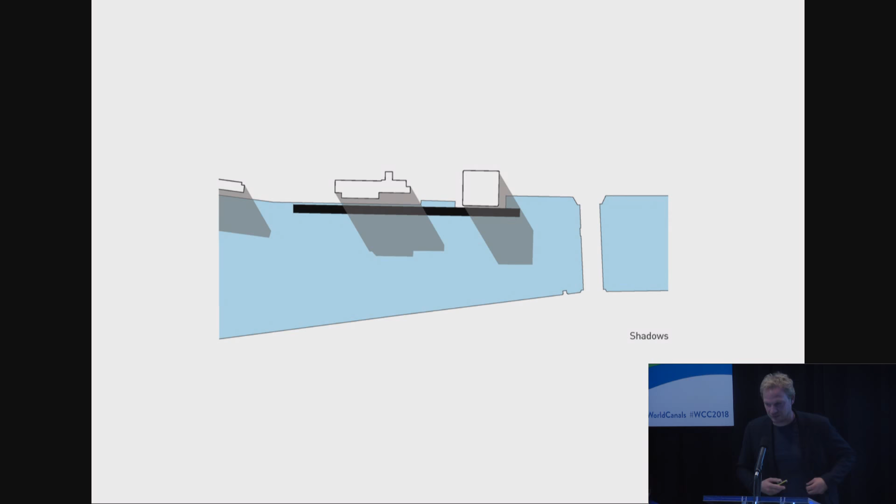The Copenhagen Waterways own the harbor basin, so we must just do something public in the basin. Problem was that, especially in the evening hours, we were in the shadow with part of our promenade.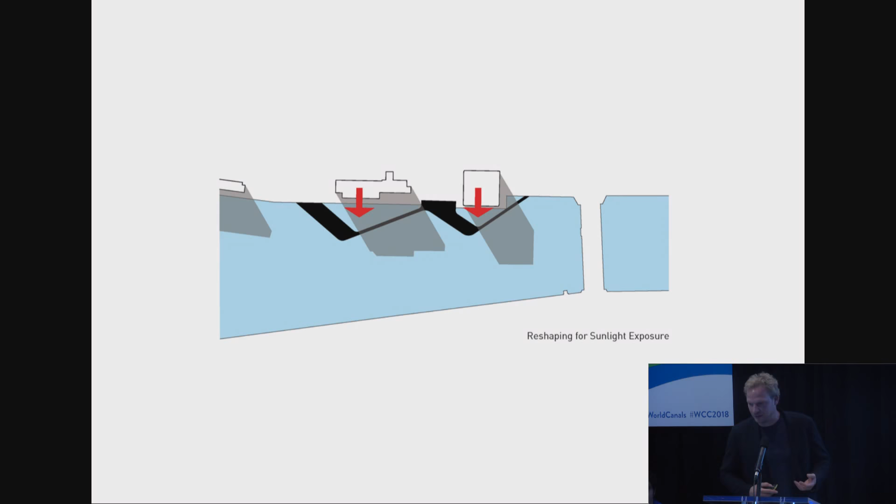So we decided we have to somehow work around this and make the gravity points of our development in the areas between the buildings, and then basically make a connection back to the hinterland at these points as well, to get access for people to come to this place.

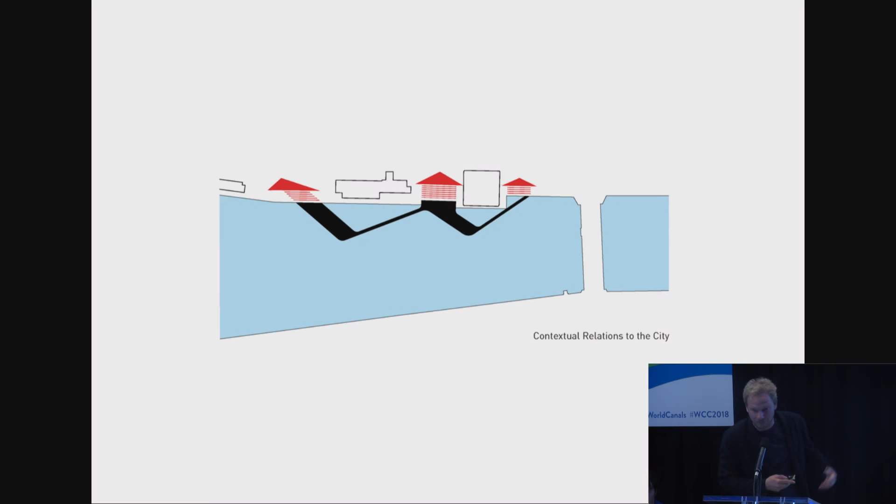So we made a lot of sun analysis studies and looked at what we could do, and decided then to make two kind of concrete hearts out of in situ concrete, and then this wooden deck around that connects the two main islands to the existing promenade.

Underneath there was a kayak hotel, where you can place your own kayak for whatever, €200 a year. You can rent a space, and then after hours go and kayak and put it back in, or you can just rent a kayak.

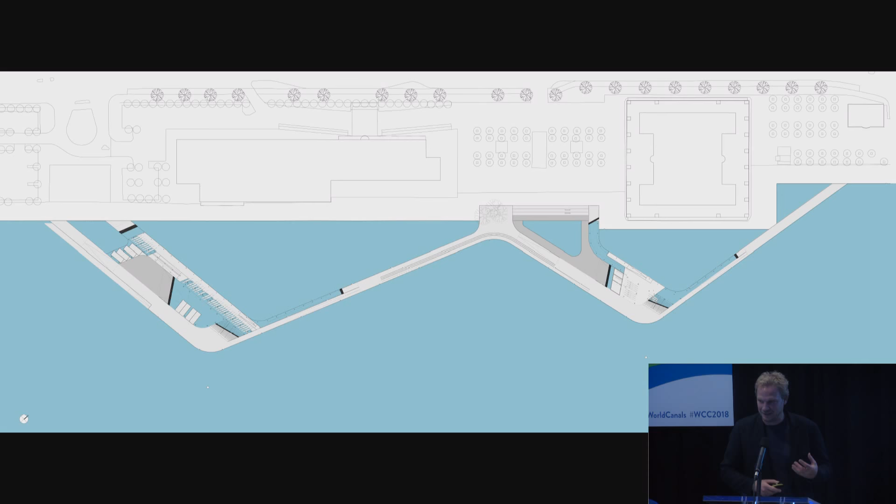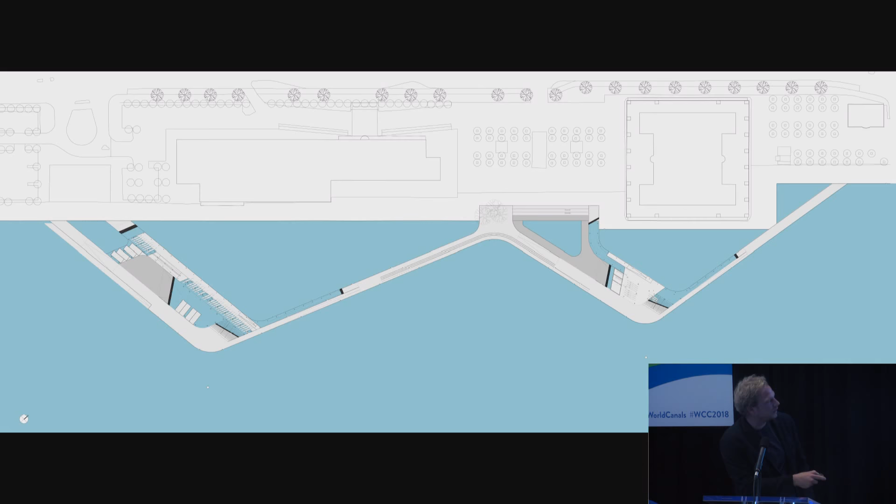And on the other side is something for kids to go and be able to experience water, with the school and so on. It was actually one of the things that never really got funding. But there's another funny story about that.

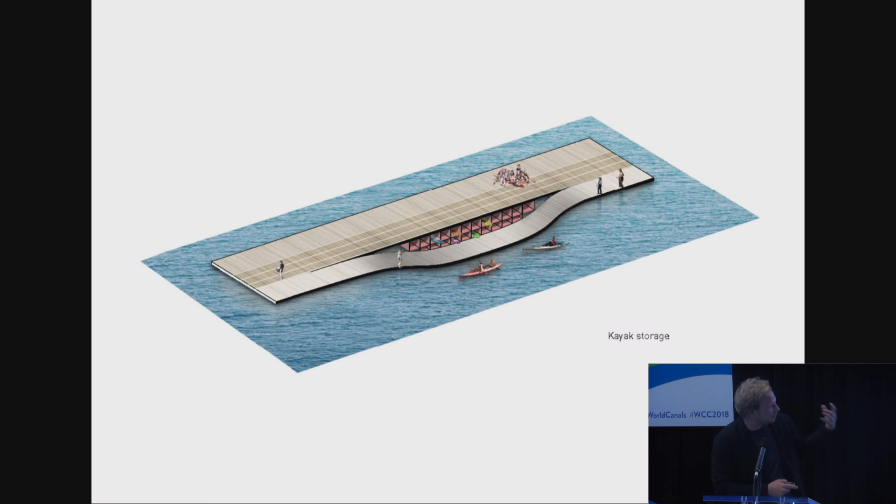So this is then some illustrations of what we had in mind, and this is during the construction time. There was, in the competition, all kind of different ideas of how to integrate kayak storage. A harbor taxi should come and create some areas that can also be used to just serve a coffee and so on.

Problem with this is that this was the idea of a triangular basketball court right next to the bank, including the existing kind of stairs they have to the waterfront. And that was another thing. We don't want anybody playing basketball right next to our headquarters, it makes so much noise.

And the second person who held a speech at the opening ceremony was the leader of the bank. We had to, or the municipality actually had to threaten them to, I don't know what it's called in English, depropertize or whatever, like to take part of the promenade from them in order to get them into the boat at all. So they were basically saying they can do that in infrastructure projects, that they say, okay, we want this to happen, so you have to give us the land.

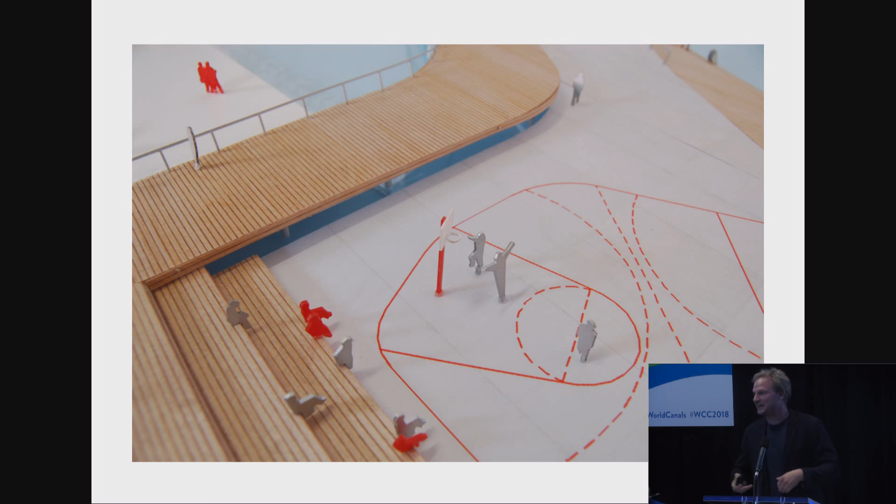And then, like, 5% of the budget was spent on lawyers discussing with the bank, and then the first thing is when it's there, they're like, yeah, it's so nice right in front of us.

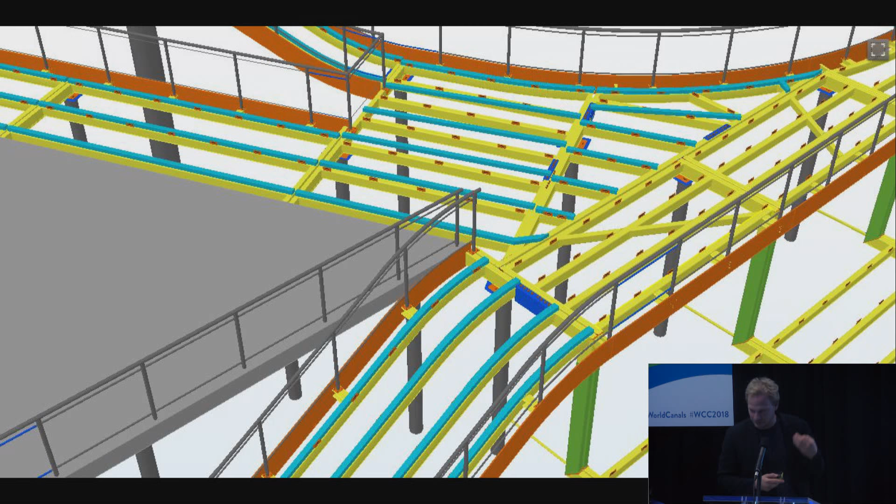And this, the whole project was made in BIM, so basically every screw was drawn in advance and was prefabricated. All the steel work was coming from Poland, and then the in situ concrete was made on the site, and that made it very well manageable and organizable for the building process. It was relatively efficient.

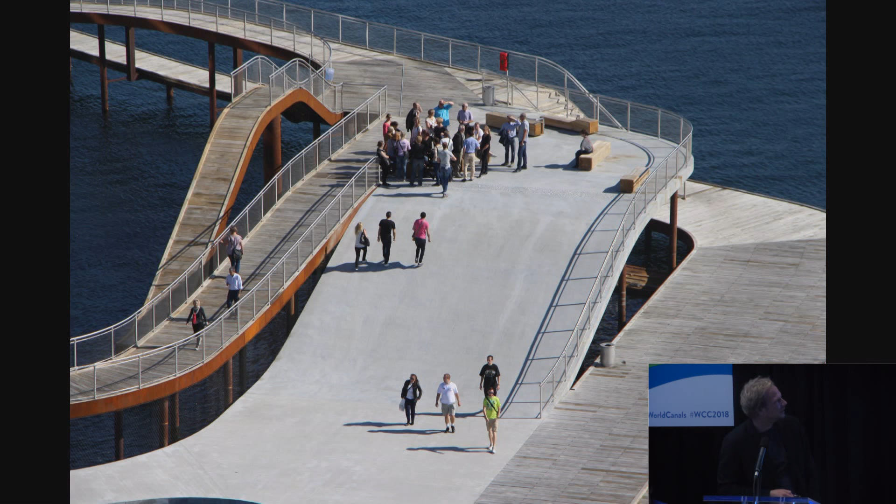Now, this is one of the concrete islands, on a day that is not really a summer day. On a good day there's a lot of people on the harbor bath, but now also on the other side using the promenade on the city center side. Although in the beginning you were not allowed to bathe, now you're actually also allowed to bathe here, as you see. It's again all about the relation of the body to the water.

This foundation with lottery money had ideas about what should be happening, and they said there must be a jungle gym kind of thing. So we made one thing, which was the idea of making a kayak slide. In the end it was a bit too dangerous, I think, and there were only a few kayakers with helmets using it, but the kids started using it as a jumping tower.

The whole lower level can flood, so we had to put the facilities we have, like changing rooms and so on, in containers, in order to be able to close the doors and let the water rise. Unfortunately, already in the first winter, the water rose all the way up to here, but it worked. All the materials basically refer to maritime materials, like oak tree, and okay, I'm stopping.

Last images: the kayak polo field. This is one of the moments where you feel like you're actually on a boat, one of the high points, and another point is low where you can just be on your own, even in winter, enjoying a moment of sun.

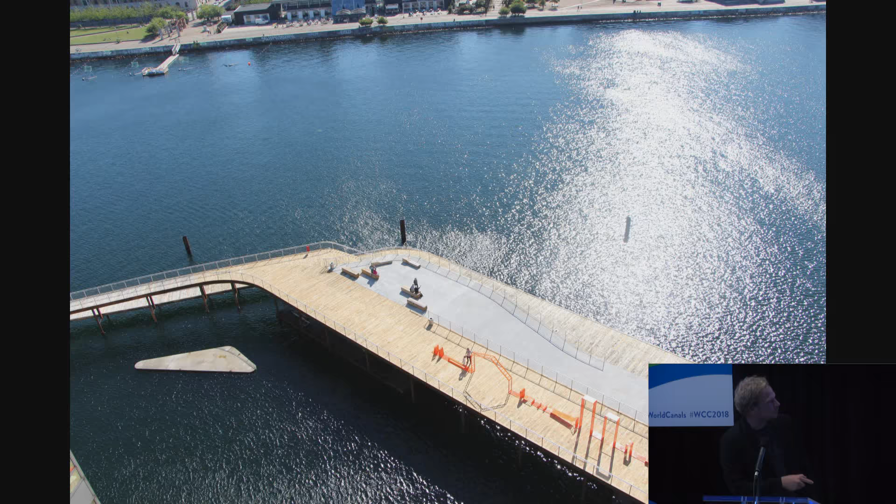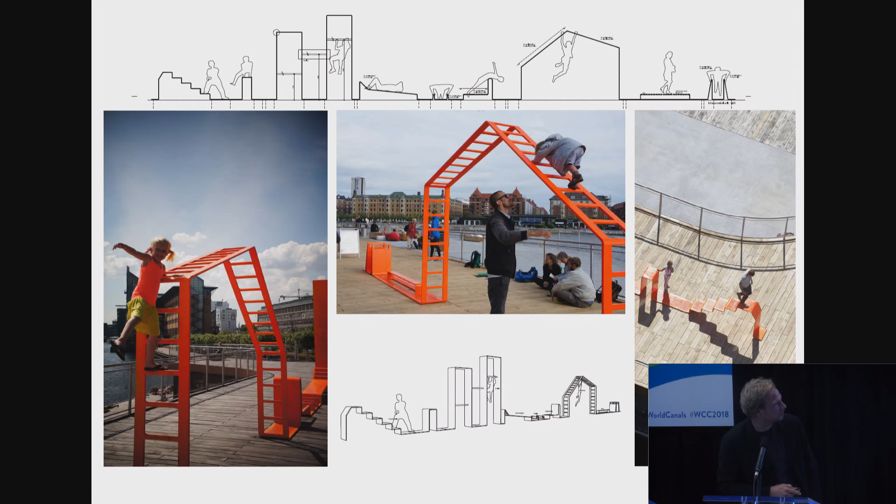This is a skateboarder. Very briefly, this is a jungle gym, folded out of one piece of steel, with all kinds of different features. So it's both for people who go jogging and want a little jungle gym moment, or just a playground. And I'm finished right now.

After the success of this - when I got here, this was one of the first days after the opening. It was also lucky it was such good weather, but you feel like, wow, it really works. Then in our Dublin office, somebody said, why can't we make it also work in Dublin? They made a little collage, basically just changing the background, showing what would happen if we made it in Grand Canal Dock, and it ended up in the Irish Times as an idea for how you can actually activate the dock.

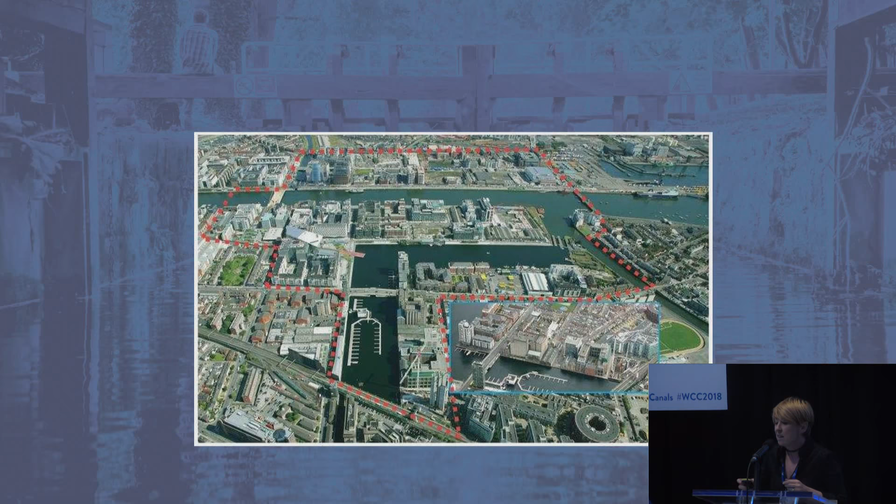So this is the Docklands. Some of you have already visited, I met you on Friday at the pre-conference tour. Grand Canal Dock is the beginning of the Grand Canal. At one stage it was the largest dock in the world. You can see it there with some jetties on it.

Just to give you some context, in the 70s, on one side of Grand Canal Dock, Hanover Quay, it was said in Dublin that it was so poisonous it could never be built on. Now this area, 50 years on, is the home to the Google European headquarters, Facebook European headquarters. We refer to it in Dublin as Silicon Dock. It just shows you how, with vision, inspiration, commitment and money, a place can go from being so poisonous it can't be built on to this amazing location in the middle of Dublin.

But as I say, we're at the beginning of a journey because we have all these amazing companies here, but Waterways Ireland are the custodians of this remarkable asset in Grand Canal Dock and had the vision to put a team in place to lead the development of that, which is what I'm doing.

So you can see here, Grand Canal Dock is on one side with the jetties. You have the River Liffey, and across the River Liffey you have the smaller second cousin, we refer to it, it's Spencer Dock, which is the beginning of the Royal Canal. So that's the area in Dublin, the aerial view.

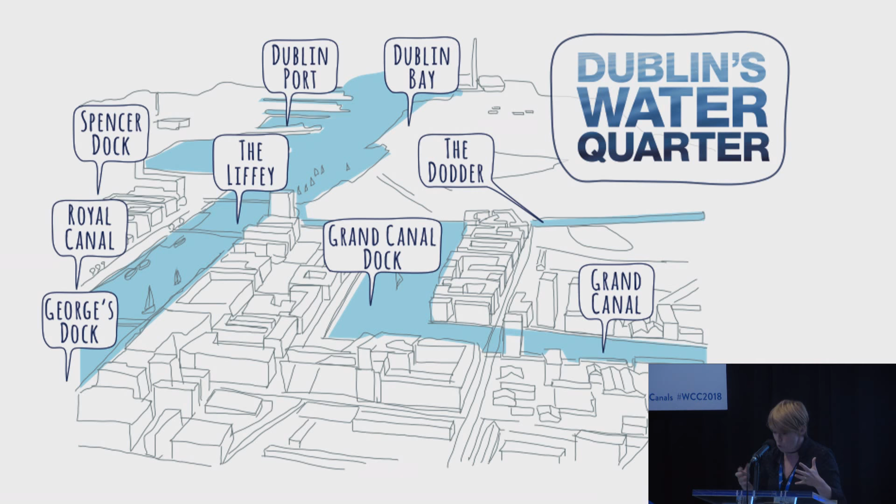So this is the vision, to develop Dublin's Water Quarter, and that Grand Canal Dock then becomes the jewel in the crown of Dublin's Water Quarter. So the aim is that the Dublin Docklands team, with our partners and stakeholders, because we don't have the money to do it on our own, as Richard pointed out, for big ambition you need partners and stakeholders to create a world-class blue playground destination that is proudly and authentically Dublin.

That's important. It has to be different from Scotland. It has to be different from Rochester. It has to be different from Copenhagen, because when those 3 million extra tourists think about where am I going to go on my holidays, they want something that's different from Copenhagen, different from Scotland, and authentically Dublin, and that's what we're setting about to achieve.

So something that's authentically Dublin, a place in the great outdoors that can inspire people to wellness, and that's what I was talking about, it does something for your soul. A place that is brimming with life, animation, culture, and vitality in the centre of Dublin Docklands. And I'm privileged enough to be leading the development of Grand Canal Dock as the jewel in the crown of Dublin's Water Quarter.

So the three pillars will animate the waters. We look at different activities to animate the water, because it's no good having this water body here if you can't use it, if you can't sit beside it, if you can't get on it. So we'll animate the waters.

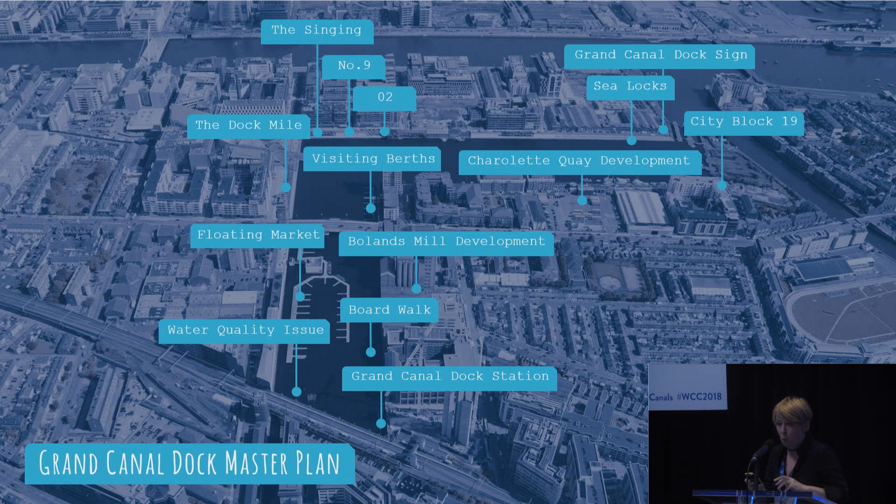U2 have a building there, and they've gone out to planning to look at a museum there. So hopefully, when I speak at the World Canal Conference in four years from Rochester, I'll be able to show you the after pictures of how Grand Canal Dock has been turned into this truly jewel in the crown of the water quarter.

Spencer Dock - on the far side of the river, in the water quarter, is Spencer Dock. Spencer Dock is the dock that's the beginning of the Royal Canal.

We are also looking at a master plan in terms of creating a remarkable destination in the city at Spencer Dock. Spencer Dock is an unusual geographical location in Dublin. On one side, you probably have the most challenged and socially deprived communities in Ireland, so much so that the government has put in place a specific task force in relation to the development of that side of the dock. Across the narrow dock is Google Silicon at its best - there are apartment blocks with swimming pools on the roof. So you couldn't get a more obvious divide between the haves and the have-nots. Spencer Dock represents a remarkable opportunity to use water to bridge the gap between those who have and those who have not.

We're really looking forward to coming up with the master plan, and hopefully I'll be able to come back and show you the delivery of that master plan in a couple of years' time.

And then, of course, the canals. We are so lucky for such a small city in Ireland to have two canals, and we're looking at the development of the canals in Dublin. We're animating the canals, creating connections and building destinations. In terms of working on the canals, we have this idea to create a greenway.